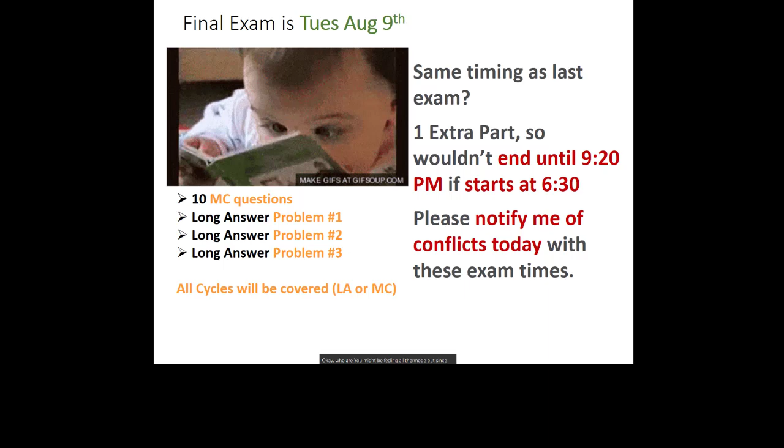But because we're drinking from the fire hose in this 6-week time frame, it's time to start thinking about the final exam as well. We wrote the second midterm yesterday, so about 2 weeks from yesterday, not next week but the week after, Tuesday August 9th, is when I'm tentatively scheduling the final.

I will need your help and some input from you about what time works. Unlike the midterms, which were 10 multiple choice and 2 long answer problems, the final exam will be 10 multiple choice and 3 long answer problems.

Good news is that the final exam will have equally weighted parts, so the multiple choice ends up being weighted a little less than in the midterms. I think it's worth 30% in the midterms and 25% in the final.

If we start at 6:30, since the exam will be longer, we'll still get the same amount of time for that extra long answer problem. There'll be an extra 5-minute break after problem 2, and then an extra 40-minute problem. If you have accommodations, you'd scale that time accordingly. But that means if we start at 6:30, we won't be finished until 9:20.

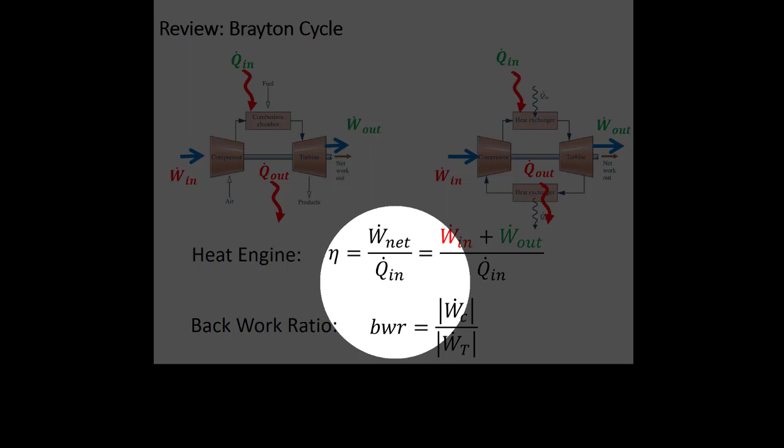So last class we talked about Brayton cycles. When we think about those 3 questions: how do we characterize the cycle? This is a heat engine, so it takes heat in and turns it into net power, which means we characterize it by its thermal efficiency—the net power over the heat rate in—or we can think about it as a backwork ratio, the magnitude of the compressor power divided by the magnitude of the turbine power. That's acknowledging that the compressor is the first consumer of the power plant.

So the second question is, when we look at each process, is it an open system or a closed system? For this cycle, because each process happens in a different place, like an assembly line, that means it's a series of open system processes. That means we use the open versions of the first law and the second law.

Our third question is, what's the fluid? Here the fluid is air, or some other ideal gas. That's what makes it different than a Rankine cycle, because it's very similar to a Rankine cycle, since the answer to the first two questions are the same, that it's a heat engine with open processes. But because it's a different working fluid, we fix the states differently.

If I was drawing a TS diagram, at least of a 4-component Brayton cycle, this is what it looks like. We go through this ideal compressor, then we add heat, then we go through an ideal turbine, then we reject heat.

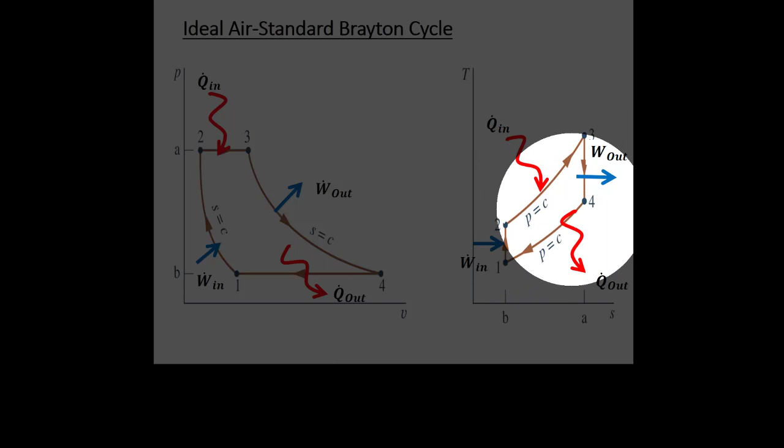If we try to do the analysis, because it's a series of open systems, we apply the open version of the first law. We make all of these assumptions for the different components, hopefully assumptions we're getting used to making. And we find that if we're trying to find work, it's m dot times h in minus h out. If we're trying to find heat transfer, it's m dot times h out minus h in. We let the first law deal with the signs, understanding that heat in is positive and work in is negative. But now we get to the point where we say, what's the fluid? How do I fix these values of h's?

And because it's an ideal gas, we need to use the ideal gas law, right? That might be useful as we move from state to state.

But my argument to you, and I've been teaching the class for a long time so I think it's a good argument, is that when you have cycles where the working fluid is an ideal gas, you need to be able to identify where any isentropic processes are. So where are the processes where you get work and usually don't have heat transfer? Where are your ideal turbines and where are your ideal compressors inside the cycle?

That's where you're going to be able to use these different expressions. And if it's a variable specific heat problem, then because it's an open system and we normally know pressure ratios, you get these relative pressures, PR over PR, and you'll get this pressure ratio. So if you know the compressor pressure ratio, you can use that to find PR at the exit of the compressor, and then go to table A22 and interpolate backwards.

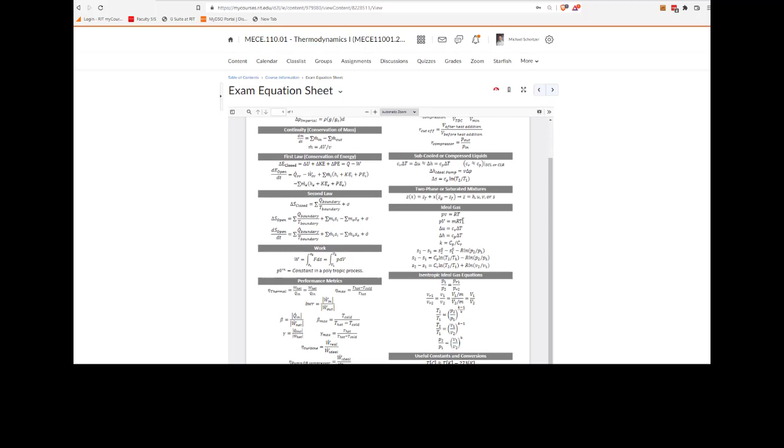So if I go to course information on the My Courses page, I like to look for this exam equation sheet. This is the one that I wrote. If you were writing the exam in person, this is the only reference material you'd get aside from the tables. Here we can say that if we have ideal gases, then I can use all these equations. But if they're isentropic ideal gases, then I can use these equations.

So if it's constant specific heat, I use one that has K in it, because anytime I have an equation that has Cp, Cv, or K, which is Cp divided by Cv, in order to write that equation down, I have to have assumed specific heat is constant, otherwise I'd be integrating that specific heat value over the range of temperatures, which we just wouldn't do. That's why we have the tables. But if you want variable specific heat for a more accurate answer, you use table A22, and then an equation with PR over PR or VR over VR, which are things you look up in the tables. Now, which equation do you pick?

My argument is that if it's an open system, you're probably going to know the pressure ratio. So if you're talking about a Brayton cycle with a bunch of open systems, you'll know pressure ratios. If it's constant specific heat, you use T over T equals P over P to the power of K minus 1 over K. If it's variable specific heat, you use P over P equals PR over PR. But when we did internal combustion engines where the processes were closed, we knew volume ratios, so I would use T over T equals V over V to the power of K minus 1, or the equation with ratio of VRs equal to ratio of Vs. There's also an equation in the book that we put on the equation sheet, but personally that's not one I use myself.

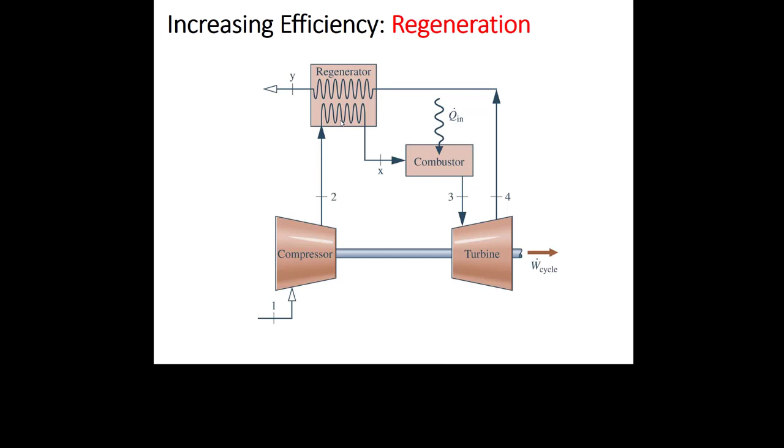Then we talked about how to improve the performance of these Brayton cycles. One way is we take the hot exhaust gas and transfer some heat from it into the pre-combusted fuel or fluid, trying to reclaim heat we'd otherwise lose to the environment. We call that regeneration.

Then we can do reheat, just like in Rankine cycles, splitting the turbine into two turbines and heating the fluid back up in between. That gives more enthalpy in the fluid going into the second turbine, so we can harvest more mechanical power from that second turbine than if we just went through one turbine.

Unlike Rankine cycles, backwork ratios are relatively high in Brayton cycles because it takes more power to increase the pressure of a gas than a liquid, since gases are compressible. So we want to reduce the power consumed by the compressors, and one thing we do is split the compression process into two parts and cool the fluid in between. That increases net work, not by increasing power created, but by reducing power consumed, so net work goes up.

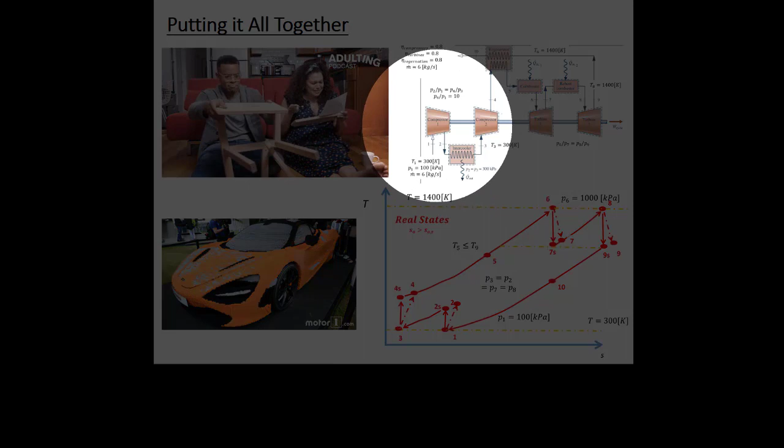Then what we did is take all of those parts and put them together in the last example from the last class. It's pretty complicated, but it's something I've asked on final exams before, walking through a process like this. It wouldn't be as much work as the example we did last time, because you wouldn't get a state table that's mostly empty like before. Instead you'd get a state table that's mostly filled out, but we'd expect you to find the isentropic efficiency of the first compressor or one of the turbines, figure out how to deal with the regenerator, and find H5 and H10. Those are things we can ask you. So the message is you'll probably see some complicated stuff on the final.

Try not to look at that problem and say, I don't know what's going on, it's too hard. Instead, look at the state table, notice it's mostly filled out, and say, I know the process for how to do this. Most of it is going to be symbolic work, which doesn't take that much time if you know how to do it. So really focus on picking the right equation and making the right assumptions so you can get the symbolic equation. That's the high-level overview of what a Brayton cycle is.

And it leads us into turbojets. Turbojet engines are jet engines that you'd see anytime you fly anywhere. Sometimes when you fly in and out of Rochester you have turboprop planes, but if you have a jet engine, this is probably what's hanging under the wing there. It's kind of cool because the core of this, as we'll see, is a Brayton cycle, but there's some extra things going on.

I like to ask this question when we start to look at these turbojet engines: what is it that we need in order to fly? You can think in your head if you don't want to answer out loud.

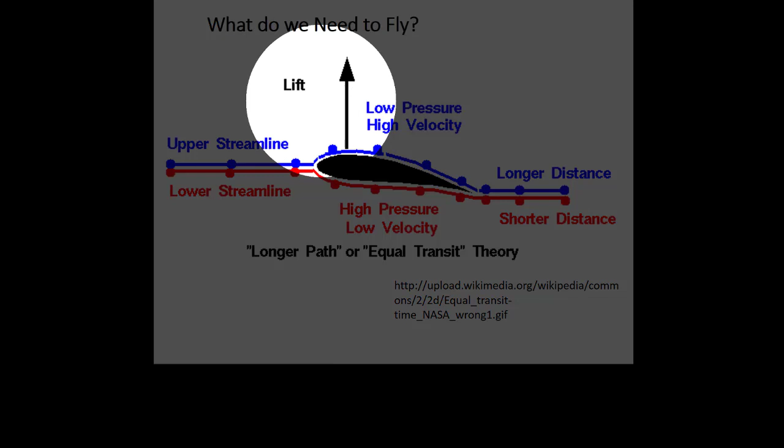What you'll learn in fluid mechanics is that the design of a wing is actually really important. The shape, the cross-sectional shape of this wing, is really important for how it flies. Because how an airplane flies, yes, lift is super important - that's what happens in this particular problem. The way we generate lift is we make this wing that has a very special shape.

When air flies over it or is pushed over the wing, what happens is we generate high pressure air underneath the wing and low pressure air on top of the wing, and that comes from the shape of the wing. It's super cool. So you've got high pressure underneath the wing and low pressure on top, so you have a net force up on the wing. And if that net force is high enough, then you can get this heavier-than-air machine that's full of people and their luggage to fly through the air. It's kind of a triumph of human ingenuity.

But how do we get lift? In order to get lift in this picture, we need air to be flowing over the wing at a high rate of speed. So in order to do that, we need to generate thrust, and that's the job of the engine. We're going to talk about turbojet engines, but it's true of propeller planes too - you're trying to essentially push the plane forward fast enough so that even if the air is still, or even if you've got a tailwind, so even if the air is kind of going the wrong direction, the plane is moving fast enough relative to the air that it looks like, if you're a crazy person standing on the wing, it feels like the air is really whipping into your face. So the important thing here, in terms of this course, is the thrust that gets generated by this engine.

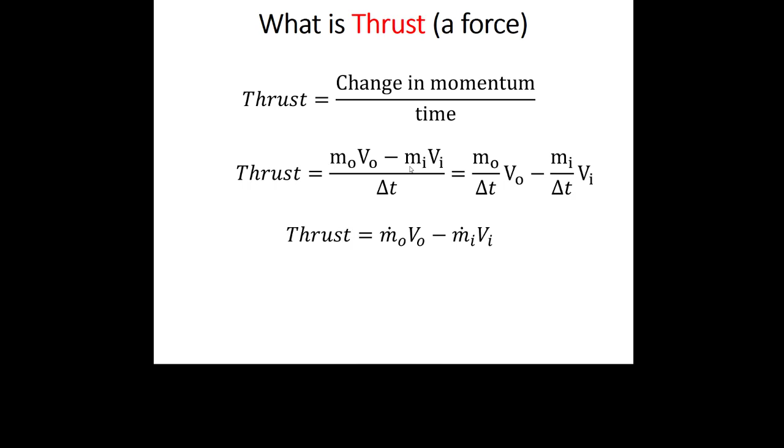Thrust is defined as the change in momentum over time. Momentum is mass times velocity, divided by time delta T. Or we could say mass over delta T times velocity out - that's the air going out of the jet and the air going in. So what the jet is trying to do is push air very fast out the end of the jet - it takes in air and pushes it out faster. So mass divided by delta T, if we take the limit as delta T becomes infinitesimally small, becomes a mass flow rate. So the mass flow rate times the velocity of the air out minus the mass flow rate times the velocity of air in is equal to our thrust force.

Right now, if the jet has one air inlet where it's sucking air in, maybe you've seen those super slow motion videos where they test the blades, chucking like a frozen turkey into a jet engine. You should check that out because it looks awesome on the high-speed videos.

There's really only one mass flow rate because there's only one inlet and one outlet here. So the thrust force is the mass flow rate times the outlet velocity minus the inlet velocity.

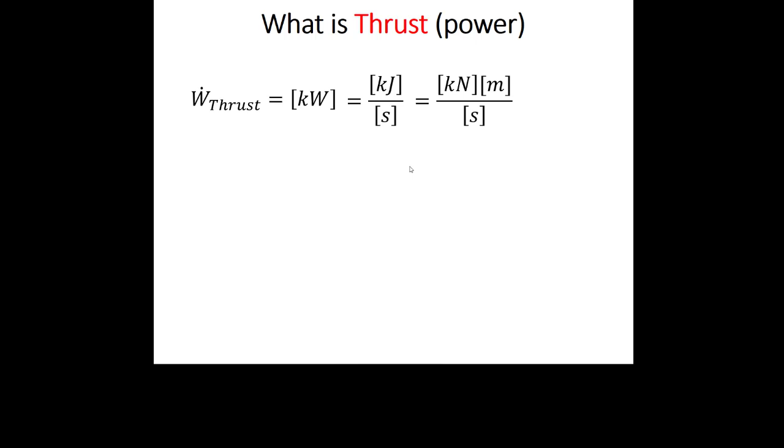But if you think about thermal efficiency, we want this in terms of power. So how do we get from a thrust force to a thrust power? Power is kilowatts, which is kilojoules per second, and what we have is thrust as a force, so kilonewtons. Kilonewton meters is kilojoules, so kilonewtons times meters per second is the same as the thrust force times the velocity. So if we take the thrust force times the velocity of the jet, then you can get a thrust power.

So if you're looking for thrust power, you take your thrust force, the mass flow rate times V out minus V in, times the velocity of the jet, and that would give you the power developed by the engine.

Notice this is different, because every other time we've talked about power, the reason we don't ask about thermal efficiencies for turbojet engines is this is not mechanical power in the way we've thought about it for other engines. It's not a rotating shaft, which we could get an electrical engineering friend to put on a generator to turn into electrical energy. So this is thrust power, the power of the jet coming out of the back of the engine.

Now the energy cost, well, this is just like your automobile, or your Brayton cycle or your Rankine cycle - it's the heat in. So here we're burning jet fuel, so we need chemical engineers, because they're going to take oil and separate it into all these different chemicals, one of which is jet fuel. So it's still going to be heat in. We're going to burn that jet fuel at a particular rate, it's going to give us a certain amount of heat or heat rate, and that'll give us our thermal efficiency.

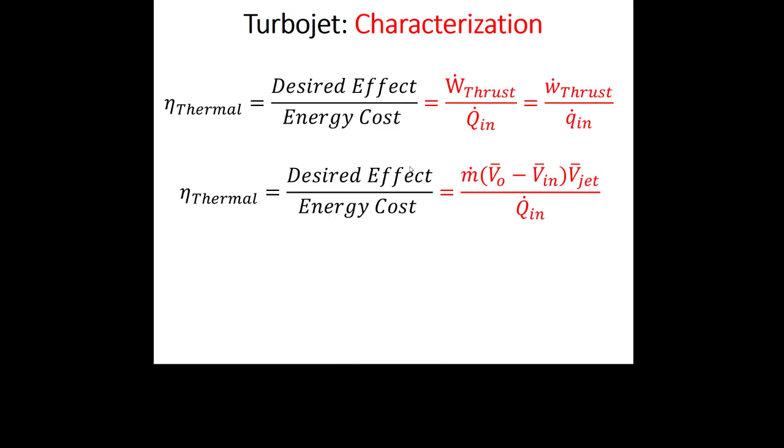But we don't really talk about it this way in the textbook. So I'm never going to ask you about thermal efficiency of a jet, but I just want to show that it's possible to still think about it like this, as an energy benefit divided by an energy cost.

One of the tricky things about jet engines - maybe there's a couple of things. First, your airspeed matters. Maybe you've been on a plane where they tell you we're running a little ahead of schedule because we've got a little bit of a tailwind. So that matters, but for us, we're always going to assume that the air is still.

And we're usually going to think about the problem as if you're that crazy person standing on the wing. So it feels like the velocity of the air is whatever the jet velocity is, but just in your face instead. So your frame of reference is that crazy person standing on the wing.

So this is, at least schematically, how we can think about a turbojet engine in terms of a thermodynamic device. It's got a diffuser at the beginning, because the jet is screaming forward, but we're going to think about it as if we're standing on the jet. From the perspective of the engine, it feels like the air is coming into the diffuser with some form of kinetic energy because it feels like it has a velocity.

Even though the air is still, for somebody standing on the ground, it feels like if you're standing on the wing that it's really windy. So we're going to take that kinetic energy of the air and turn it into enthalpy.

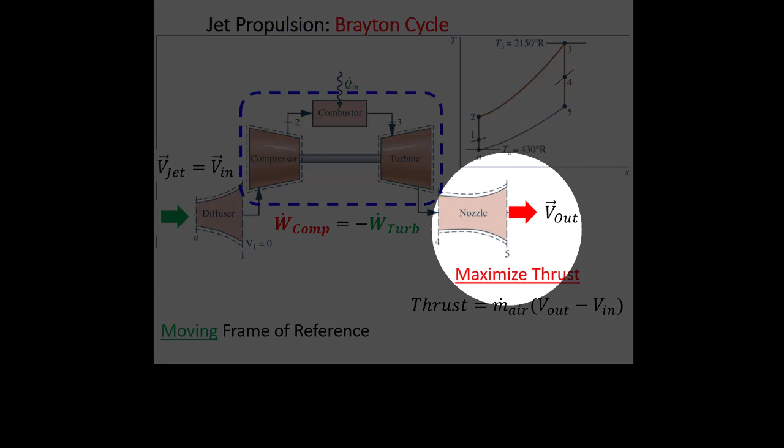And then there's a turbine. So after we add heat, we've got a lot of enthalpy in this fluid. We're going to take some of that enthalpy out of the turbine, but try to leave as much enthalpy as we can at state 4, because our job for this engine is not to maximize the turbine power. That's why turbojets are different than Rankine cycles and Brayton cycles, because the job here is to maximize the kinetic energy at the outlet of the nozzle.

So we solve this mostly like a Brayton cycle problem, except there's a nozzle and a diffuser. And when I tell you that, the hairs on the back of your neck should stand up a little bit—your spidey sense should be tingling—because that means kinetic energy, at least when we're outside the jet, at a state that's not touching the Brayton cycle, is important. That means units are going to be a problem. So how do we solve this problem?

We start at the diffuser. The diffuser's job is saying, well, if this air is coming in with some velocity, why don't I harvest that velocity to increase the enthalpy before I even get to the compressor?

So it looks like, as in the labeling here, this is one of those things where I think the textbook tries to help us, because it's still state 1, 2, 3, 4 here as we go through the Brayton cycle part of the turbojet. They try to keep that numbering the same. But that means they needed something else to call the inlet of the diffuser, and they call it state A. So usually we stick with that nomenclature.

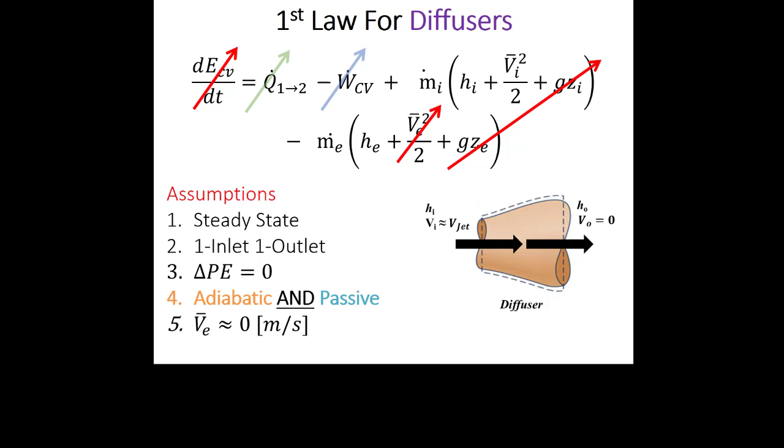But the thing we're going to do here, when we think about these things in turbojets, is we're going to cancel out one of the kinetic energy terms. Now, what it looks like here is that we're saying the exit velocity is 0. We know that's not true.

Really, what we're saying here is that at the inlet, both enthalpy and kinetic energy are important, because the kinetic energy is high. But at the outlet, or the exit, enthalpy is certainly important, but we're going to assume we've dropped that kinetic energy low enough that it doesn't matter anymore. And remember, the velocity here, even though it gets squared, has to be pretty high to matter, because even though this looks like velocity squared over 2 in metric, this would be in joules per kilogram instead of kilojoules per kilogram if my velocity was in meters per second.

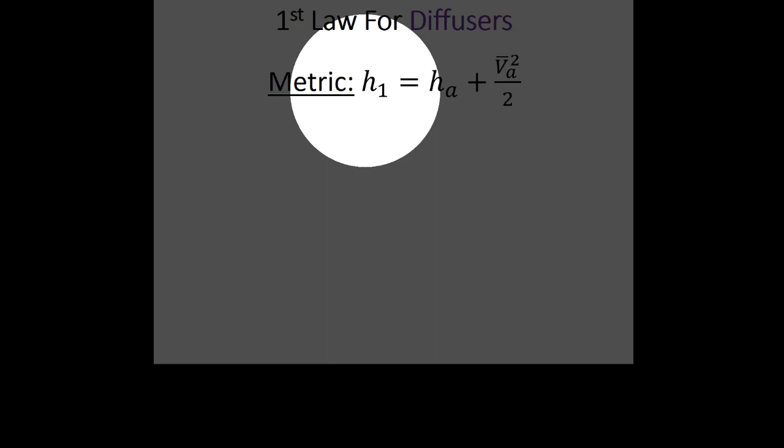So then I'd have to divide not just by 2, but convert 1 kilojoule equals 1,000 joules, so I divide by 2,000. That number gets small quickly, right? So we're going to assume the kinetic energy is small enough that we don't really care about it at the exit of the diffuser. So at the inlet, enthalpy and kinetic energy are important, but at the outlet, it's only enthalpy that matters.

Now, unfortunately, you're still going to have to do problems in the imperial unit system here. The units, no matter what, this kinetic energy term is going to be tricky because you're probably still going to have to deal with units here, since this is probably going to end up in joules per kilogram. When you look it up in the textbook, it'll be kilojoules per kilogram.

So the units still matter in metric, but it's even more tricky in imperial because first you've got to divide by GC just to get the right quantity, energy per unit mass, but the energy here is going to be in feet per second squared if your velocity is in feet per second. Or sorry, this term is going to be in foot-pounds per pound mass. So not only do you have to divide by GC, but if the velocity is in feet per second, you also have to multiply by 1 BTU per 778 foot-pounds force. So that's the kinetic energy term.

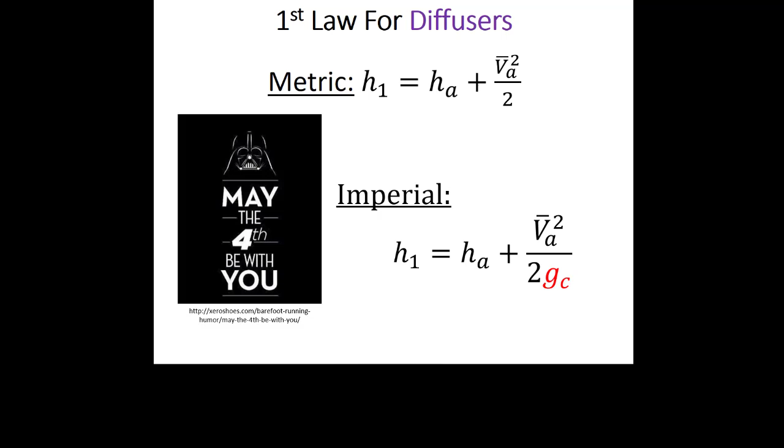So the diffuser is one of the places where people get tripped up, dealing with the units, particularly of the kinetic energy on the diffusers and the nozzles. So the units here are important. That's how we go through the diffuser.

Next, we're going to go through the Brayton cycle. Now, mostly this is the same as a normal Brayton cycle, but there's a wrinkle here when we get to the turbine. Because normally when we go through a Brayton cycle, a couple of things are true: the inlet to the compressor, or at least the first compressor, is the atmosphere, and the outlet from the last turbine is also the atmosphere.

So those two things have the same pressure, but that's not true here. It's not true here because neither of those two components touch the same reservoir. They're not touching the atmosphere, because one is touching the exit of the diffuser and the other is touching the inlet of the nozzle. So those pressures are not equal. That's the first thing that's tricky. So we can't solve these things by assuming that, oh, the compressor ratio is 10, so the pressure ratio through the turbine must be 1 over the compression ratio. We can't do that.

So instead, we remember that the job of the turbojet engine is to maximize this outlet velocity. And in order to do that, we need as much enthalpy sticking around at state 4 as we can. So we're only running the turbine so that we can run the compressor. Although maybe you'd argue in a real jet it's not just running the compressor, it's running the compressor plus whatever systems are on board.

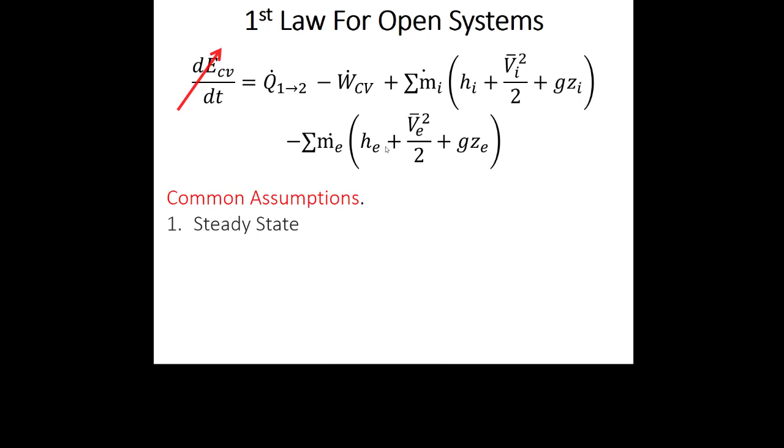All of the components will be steady state. They're all one inlet, one outlet—there's no splitting of mass here. We're going to neglect kinetic energy inside the system, as long as it's not a state touching the outside. We'll also neglect potential energy changes. Looking through these components, some are adiabatic, like the turbine and compressor, but the heat addition is passive, so there's no power there. Again, we'll neglect friction losses and heat losses throughout the system.

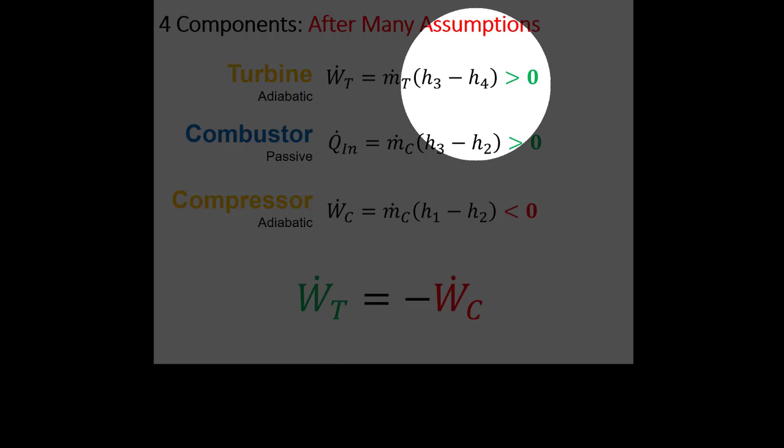Inside the Brayton cycle, we get equations we're used to: turbine power and compressor power equal m dot times h in minus h out, and heat rate in is m dot times h out minus h in. The important thing is that the magnitude of the turbine power equals the magnitude of the compressor power—that's how you solve for H4 at the exit of the turbine. This is different from a normal Brayton cycle, where you'd find the ideal outlet of the turbine and use isentropic efficiency. Here, you just say the real compressor consumes a certain amount of power, so the real turbine must produce that same amount of power.

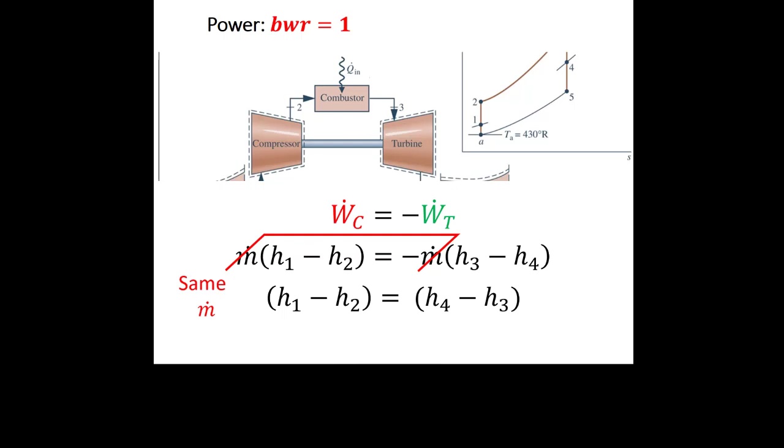So if the back work ratio equals 1, then m dot times h in minus h out on the compressor side equals the negative of m dot times h in minus h out on the turbine side—equal magnitude but opposite sign. The mass flow rates are the same because the whole system is steady state, one inlet one outlet throughout, and everything is arranged in series. From this equation we typically solve for H4: H4 equals H1 minus H2 plus H3. Typically, if there are isentropic efficiencies, it's the real compressor power that equals the real turbine power.

So that gets us up to state 4. But we're not done the cycle yet, because the whole reason we're doing this is the nozzle—we want to maximize the velocity at the outlet of the nozzle. We want as much velocity at state 5 as we can get, which is why we tried to keep as much enthalpy as we could at state 4, because the nozzle's job is to take as much enthalpy from state 4 as it can and turn it into kinetic energy. So kinetic energy is going to be important here.

The units are going to be a pain, but don't let that intimidate you—once you do it two or three times it's not too bad. Maybe two or three times in metric, and three or four times in imperial units, since it's a little trickier there. For the nozzle, we're at steady state, one inlet one outlet, no potential energy change, both adiabatic and passive—so far it looks just like the diffuser. Just like the diffuser, one of the kinetic energy terms goes to zero, the one that touches the Brayton cycle. But unlike the diffuser, it's the inlet kinetic energy that goes to zero, not the outlet kinetic energy.

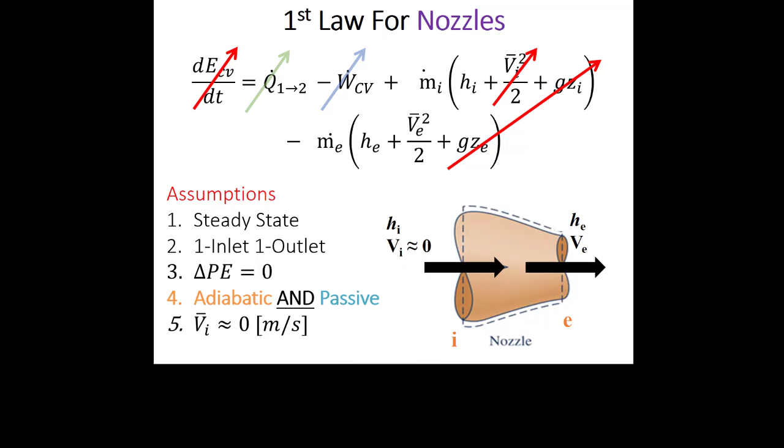So here we're solving for the exit kinetic energy, the kinetic energy at state 5, at least in the picture we looked at. We're typically solving for the velocity at the exit, though the problem could also ask for the kinetic energy at the exit. Remember that H is in kilojoules per kilogram if it's metric. Velocity squared over 2, if velocity is in meters per second, comes out in joules per kilogram. So you need to multiply by 1 kilojoule divided by 1,000 joules—meaning you're probably going to divide by 2,000 and not 2.

You're still going to have some problems with imperial units, and it's always worse with imperial units. Now we're not just dividing by 2 on the kinetic energy term, we got to divide by 2gc, and that gives us the right quantities. It gives us energy per unit mass, but it's not BTU per pound mass, that's what we're going to look up in the textbook. It's foot-pounds per pound mass. So if your velocity is in feet per second, you're going to have to multiply this by 1 BTU divided by 778 foot-pounds force. It's always a little harder in imperial units, but it's still this kinetic energy term that's going to give us problems no matter what the unit system is.

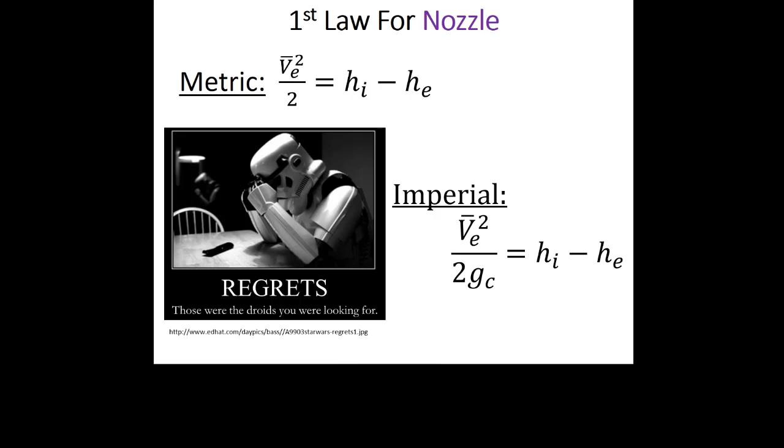We got to remember, if we're solving for kinetic energy, or if we ever had a problem where we were solving for potential energy change, we still have that same problem with the units.

So if we're just writing down the equations that we have for this turbojet engine, making the assumptions I would normally make: compressor power and turbine power are still going to be m dot times h in minus h out. Heat rate in is still going to be m dot times h out minus h in. At the diffuser, at the inlet, I've got enthalpy and kinetic energy. I got to add those two up to find the enthalpy at the outlet of the diffuser, which is the same as the enthalpy at the inlet to the compressor. And if I'm trying to find the nozzle velocity or the nozzle kinetic energy, that's going to be the change in enthalpy across the nozzle.

Units are going to be important, even if it's the metric system, which is generally more friendly, I think. It's still going to be a problem with units here.

I had an old professor, and he would always tell us that it's only about 10% of what the professor says that's actually important for your exam. And the professor, who is the person that writes the exam, thinks that the things they say multiple times are the important things.

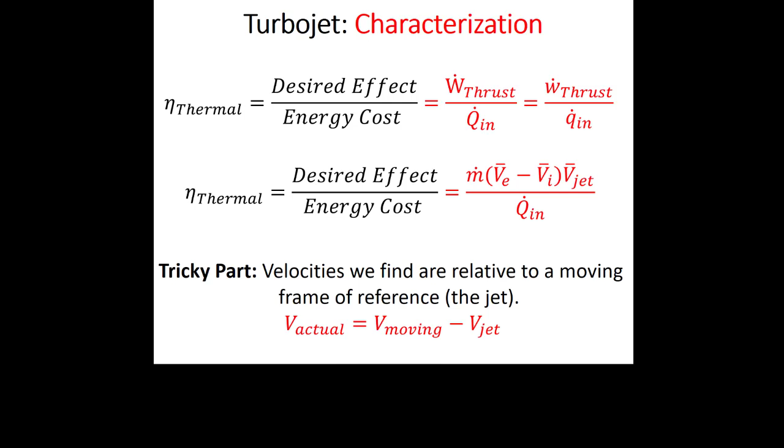Again, we're not going to ask you this on exams. On the final exam, I will never ask you for the thermal efficiency of a turbojet engine, but we could still think about it the same way we think about thermal efficiencies for all the other engines, where it's the energy benefit over the energy cost. So even though I'm not going to ask you this equation, I think it's important to understand the concept here, because the difference between the turbojet engine and all the other heat engines we looked at is that all those other engines were trying to maximize the net work or net power. But here, the thing we're really trying to maximize is this velocity at the exit. And if you remember that, I think you probably have a better chance of remembering that the back work ratio here is 1, or that the power consumed by the compressor has the same magnitude as the power produced by the turbine.

Now, generally there's not too much different for different turbojets, but there is one thing that we can do, right?

I haven't seen the new Top Gun movie yet, but I remember my dad had the VHS copy of the old Top Gun movie that we would watch frequently because he'd just installed this new sound system in whatever year it was, the late 80s or early 90s, and we would listen to Top Gun over and over again. In those military aircraft, not commercial aircraft but military aircraft, you might also have an afterburner, right?

An afterburner is basically reheat for a turbojet engine. After the turbine, before we get to the nozzle, what we want is to get as much enthalpy into the fluid as we can. That's why the backwork ratio was 1. But maybe there are applications where fuel efficiency is less important than pure performance, or pure power generated by thrust from the engine. So typically this is something on military grade aircraft, but you don't see that on commercial airliners, which are far more concerned with fuel efficiency versus maximum speed. So one of the ways we could increase the enthalpy between the turbine and the nozzle is by burning more fuel. This is what an afterburner is.

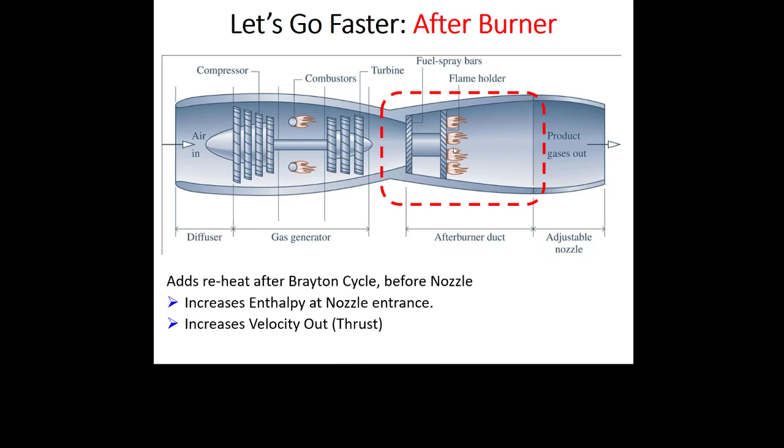Now, if I was drawing a TS diagram for an afterburner system, at the beginning it looks the same: isentropic diffuser, isentropic compressor, we're still adding heat through the combustor, we still go through the turbine, and this one looks isentropic. But then, in between, we add heat and then go through the nozzle, whereas in the normal system we would just go straight through the nozzle here. So I think of this as the same as reheat - it's just instead of being in between two turbines, we're in between the turbine and the nozzle. But you see here that the nozzle on my TS diagram does the same thing as the turbine: it reduces the enthalpy and drops the pressure, but it does that in service of generating kinetic energy instead of generating mechanical power.

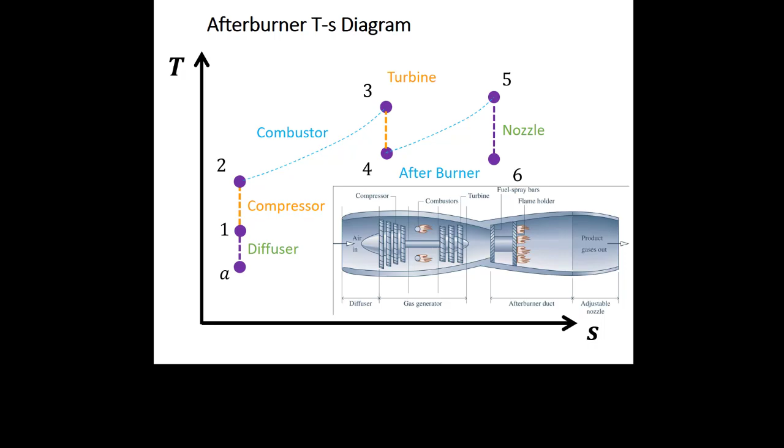So that is the end of the introductory part of these turbojet engines. But what we'll do is come back for an example - let's come back at 7:25, so maybe 7 minutes or so. I will see you in a bit.

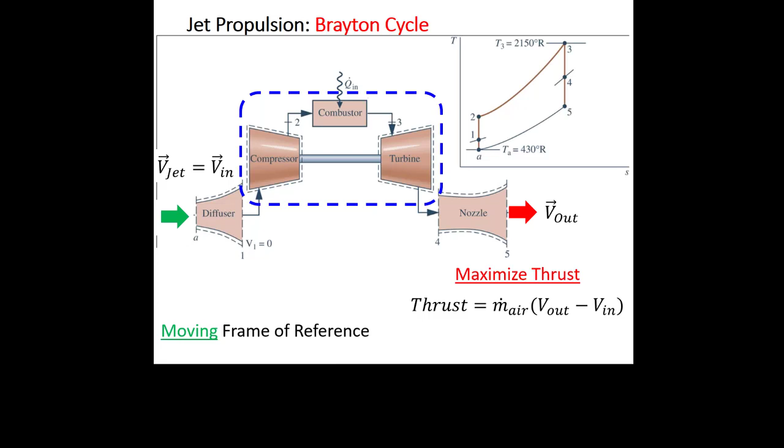So we introduced the idea of these turbojet engines last class, over the last hour or so, and we found out that really the idea here is to maximize the thrust, which for us means trying to get as much velocity out the back of the engine as we can. If you were looking at the jet from the ground on a stationary frame of reference, the jet is moving through the air - we're going to assume that the air is always still. But we're going to think about this problem as if we were a person standing on the wing of the plane. So even though the air is still in a stationary frame of reference, in that moving frame of reference it really feels like the wind is blowing really hard in our faces - so don't try that at home. Now, because we're trying to maximize the thrust, that means we're trying to get as much velocity out the exit of the nozzle as we can. In the middle of this system, between the diffuser and the nozzle, is a Brayton cycle, but it's a little bit of a special Brayton cycle because it does not have equal pressure ratios, or the reciprocal of the pressure ratio, through the compressor and the turbine.

Instead, what we have is a case where the backwork ratio is 1, so the magnitude of the compressor power is equal to the magnitude of the turbine power. As we go through the example, we're going to see why that's important. That'll let us get H4, but also, as we'll see, it lets us get P4 as well.

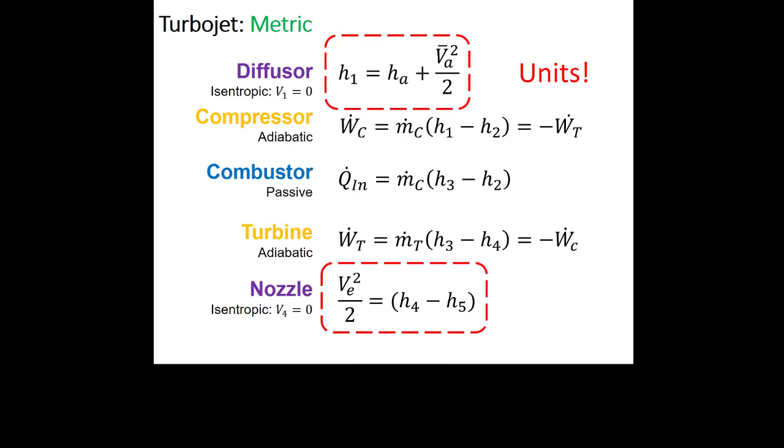If we have a metric problem, we're going to assume that this is how we calculate the result of the first law on all the different components. Remembering that the units are going to be tricky, even if it's metric, we're probably going to have to divide that velocity term by 1,000. And if it's imperial units, the equations get a little bit trickier because we got to divide by GC, and the conversion factor is a little different because we're probably going to have to multiply by 1 BTU per 778 foot-pounds, provided the velocity is in feet per second.

So what we're going to go through now is an example problem for a turbojet engine. Here we have a turbojet engine where we're given some state information, we're told the mass flow rate, we're given the compressor pressure ratio, and we're told, sometimes in a bit of a tricky way, the maximum temperature inside the engine. So I need to know how to draw my TS diagram so that I know where the maximum temperature is. It's always before you extract work from the system.

So what are we told here? We know that CP is 1 kilojoule per kilogram kelvin. We're also going to say that K is approximately 1.4. We know the compressor pressure ratio P2 over P1 is equal to 11. We're asked to find the temperature and pressure data, so we want to fill this out, and we want to know the heat rate in and the velocity at the outlet.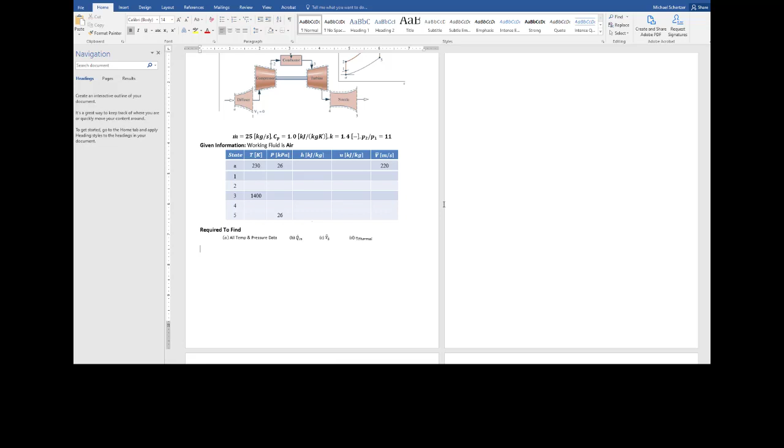I think in the notes I go through how to do this both as constant specific heat or as variable specific heat. I won't do it both ways here, but if you have a preference, you can type it in the chat because I can do it either way. I don't care which way that I do it, but I won't do it both ways here. If you go through these notes, you start to see both ways, cold air standard and variable, so constant specific heat and variable specific heat. So does anybody have a preference?

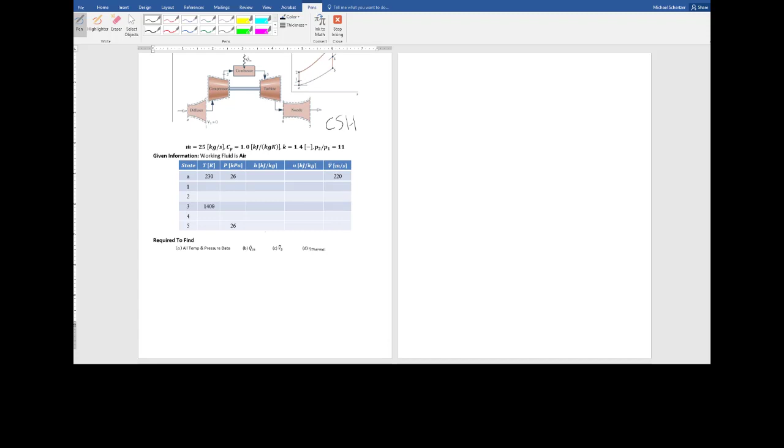Okay, I don't see anything in the chat, so I will go with constant specific heat because I think it's a little bit faster. I'll try to note at least the equations of maybe how to do it the other way. My preference is always to do the symbolic parts first. This I'm not going to do because we're not going to ask you this on an exam, so I won't go through getting the thermal efficiency of the engine.

So here, if I want to know Q dot in, for part B, I do the first law. First I got to pick my control volume over here. I guess most formally, I would do conservation of mass, dm by dt is equal to the sum of m dot in minus the sum of m dot out. But this is steady state, one inlet, one outlet, so m dot in is equal to m dot out. I only have one mass flow rate here, actually through the whole problem, because all of these components are one in, one out, and they're all aligned in series. So there's only one mass flow rate in the problem, which makes sense because they only gave us one mass flow rate. So this is 25 kilograms per second.

But it asked me for the heat transfer rate, so then I'm going to do the first law. dE by dt is equal to Q dot minus W dot plus the sum of m dot in, h in plus, I look at the units here, and because it's a metric problem, I'm going to leave this as v in squared over 2 plus gz in. So there's no GCs in this problem because it's not imperial. M dot out, h out plus v out squared over 2 plus gz out.

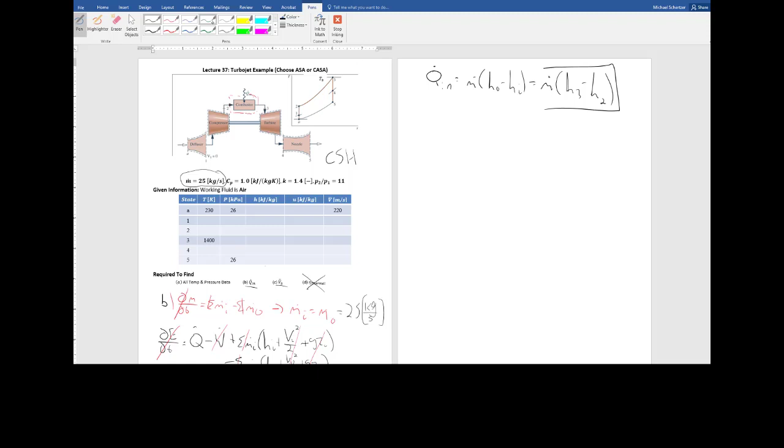So this is my symbolic solution for part B. The good news is I know the mass flow rate. The bad news is I don't know H3 or H2.

The other thing here is because I've already said I'm going to do this problem as constant specific heat, my equation becomes m dot times Cp times T3 minus T2. Because I'm doing this as a constant specific heat problem, I never would have cared about U, specific internal energy, in this problem. I'm not going to care about the individual H values. All I want is temperature and pressure for all these different states. So this is Q dot in.

Part C asks me for the velocity at state 5. For this, I'm going to have to do a first law analysis on the nozzle.

Now the equation stays the same, right? dE/dt equals Q dot minus W dot plus the sum of m dot in times H in plus V in squared over 2 plus GZ in, minus the sum of m dot out times H out plus V out squared over 2 plus GZ out. Both of these, no, I lied. I was going to say both of them are divided by GC, but that's not the case because it's a metric problem, not an imperial problem.

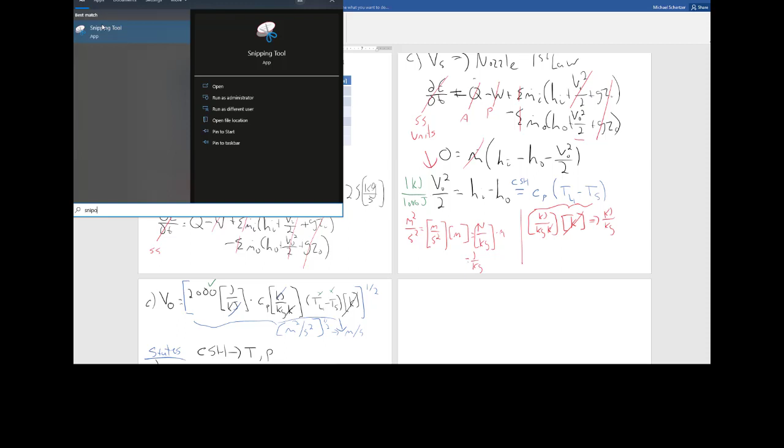State A: ultimately, because we're doing this with constant specific heat, what we want to know is the temperature and the pressure of all the different states. The beautiful thing about state A is we have both. T at state A is 230 Kelvin, P at state A is 26 kilopascals.

From state A to state 1, I ask myself, since air is the working fluid, is delta S equal to 0? And the answer is yes. Now, normally that would mean I could say, and this is definitely true, for this particular state...

I can write down my isentropic equation: T1 over TA is equal to P1 over PA to the power of K minus 1 over K, or T1 is equal to TA times P1 over PA to the power of K minus 1 over K. The awesome thing here is I know TA, I know PA, and I know K. The bad news is I don't know T1 and I don't know P1.

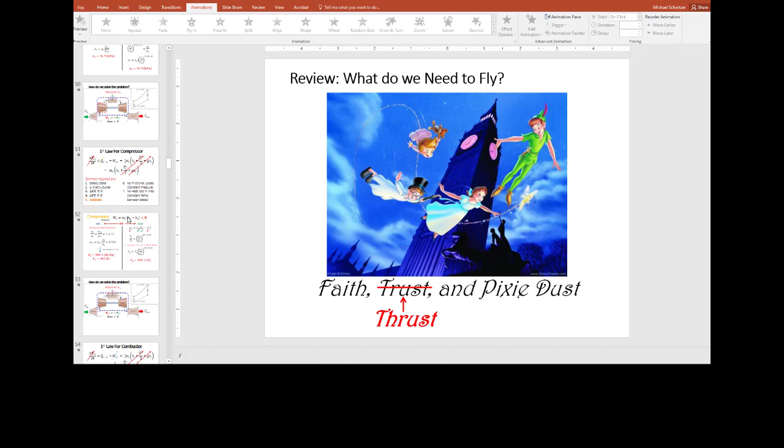I think it might be too confusing if I, in parallel, try to do this as a variable specific heat problem. But if you go to the notes, as you're going through from 1 to 2, you can see we get the temperature here and the pressure. So in the notes I do it in parallel as variable and constant specific heat, so you can still see how that's done.

Now, as I go from state 2 to state 3, this is heat in. Because there's no friction losses, that means P3 is equal to P2, which in this case is 405.9 kilopascals.

And I don't have to do anything to figure out T3. It could be if they told me Q dot in, then I could use that to find T3. But I don't have to do that because they told me T3 is 1400. So state 3 is done.

And that's good. Now we have T4 and P4. Now we got to go from state 4 to state 5, which is the nozzle. The nozzle, we're also going to assume delta S is equal to 0. We have also done the first law on the nozzle. And the first law told us, that was the equation we did right here up at the top when we were doing our symbolic solutions.

So it told us that V out squared over 2000 is equal to Cp times T4 minus T5. So V5 squared over 2000 is equal to Cp T4 minus T5. We're doing okay here in that we know Cp, now we know T4. If we knew T5, then we could solve for V5, right?

And the way we get T5 is we know that this is an isentropic process. So it's really important to know where these isentropic processes are. So because it's an isentropic process, that means that T5 over T4 is equal to P5 over P4 to the power of K minus 1 over K. P5 is the same as PA, which I believe was 23 kilopascals. 26 kilopascals.

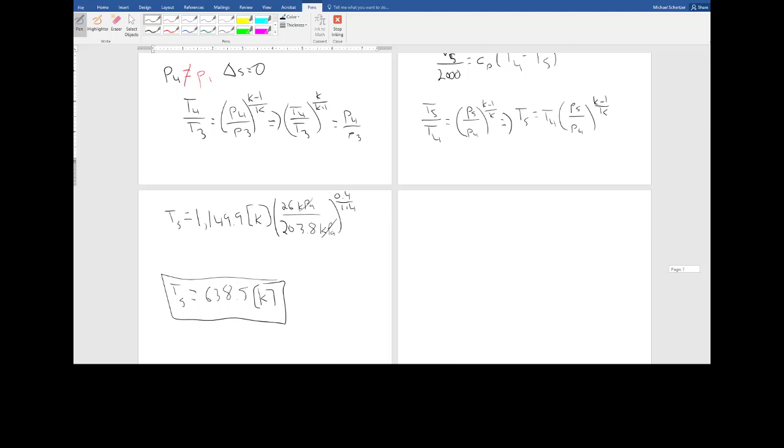So now I fixed all the states. Right, so because we fixed all the states, now we, so here we have T3 and T2. I had an equation for V out. Now I know T4 and T5. I'm going to go back to the notes to show you what the actual numbers are here.

So V5, we're always talking about the moving frame of reference here. This is about 1,010 meters per second, right? T5 we have here. The other piece we wanted to know was the heat transfer rate, which we solved here.

And you can see, even in this problem, where we're getting big temperature swings, we still get pretty good agreement with the constant specific heat and variable specific heat. Although here, 11%, that's still a sizable number, but it's still giving you qualitatively good information, right? Depending on what these temperatures are in.

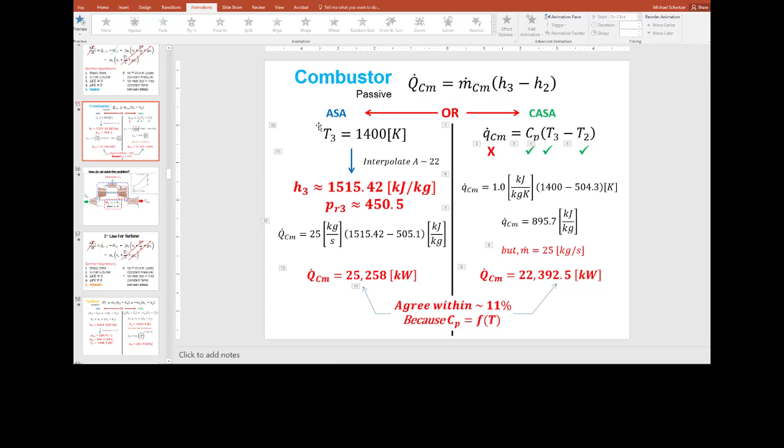If you make some kind of a change in your system, you can see, will that increase my heat transfer rate or reduce it? But you can see that if you really want—because the temperature differences here tend to be large, right—using the tables gives you a better number. And this is the more accurate number, right, with the variable specific heat or the air standard analysis.

And here you can see for the velocity, it's again a reasonable difference here. So that's how you do the problem of the turbojet. Does anybody have questions?

So I think the big things here are you need to get your units right when you talk about those kinetic energy terms. You need to remember that the back work ratio is 1, so that when you're solving the exit of the turbine power, you need to say that the back work ratio is 1 of the real components. And then you find the pressure drop across the turbine by using that isentropic relationship. So going through the turbine is a little bit backwards compared to how we would do it in a Brayton cycle.

Welcome back, everybody. Let's see, it looks like Jules just emailed me or sent a picture in the chat. Oh, good, nice. So here we see one that's really complicated.

This will be good, so we come out, we split out of this turbine here. This will be good, it'll be challenging, and challenging is good. So we will work on that next class. And oops.

Apparently it helps if you're not muted. I see the problem that Jules found there. It looks pretty complicated. So that'll be good, it'll keep me on my toes.

And it's nice to see, I hope it's nice to see me struggle, because that gives you some idea that you can do these problems like you've never seen before, as long as you follow the process we talk about. So we have some volunteers here for questions, so that's good.

If you want to see some other cases — this was from, I don't remember what summer it was from. Oh, there you go, last summer. So these are the problems that people brought in last summer.

Depending on where you live, you may have some familiarity with heat pumps and how they work, and how they can essentially be air conditioners in the summer and the equivalent of a furnace in the winter. So it's kind of the same piece of equipment.

So when we do these problems, they're also going to be open system problems. As we do these open system analyses, we need to know what the control volume is. We're going to do conservation of mass, and we're going to do conservation of energy.

And then sometimes we also have to do the second law too, right? So you might be asked to find the entropy generation rate.

But another way we thought about the second law was from the Kelvin and Planck statements. Kelvin and Planck told us this was about heat engines. They said you can make a heat engine, something that takes heat in from the hot place and turns that heat into work, but it can't turn all the heat into work because you have to cool the engine down. That's like the genesis of thermodynamics.

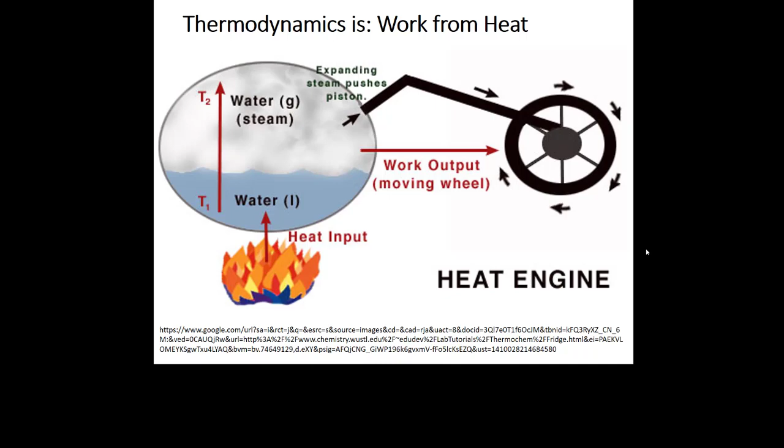So we're turning heat into work. For me, when I think about this, I think about the steam engine. The Industrial Revolution, in my mind, starts with the steam engine. I put this picture in because I think it looks cool.

But there's another problem at a similar time, and that's that it sure would be nice to be able to preserve food. There's all kinds of different ways that we can preserve food. One is we can salt meat. If you think about the age of sail and pirates, they talk a lot about salt pork, because it was something they could bring on ships and keep for a while.

You could smoke meat. My brother lived in Texas for a little bit, so he got indoctrinated into Texas barbecue. Usually when we go down there it's great, he's got briskets or ribs or something going.

And my grandparents, in their house, which is an older house obviously because they're older, they had a cold cellar. That was an uninsulated room that was basically open—well, not open, but didn't have insulation. So it was cold because the earth is cold as you dig down far enough.

So this has obviously never happened, but somebody like Clausius comes around and looks at that cold cellar and says, well, can I make a machine that keeps some volume of air cold? Can I make a refrigerator? And Clausius, when looking at the second law, thinks, okay, now we're not taking heat in from the hot place—we're pushing heat from the cold place to the hot place. And we can do that, but we can't do that and generate power. In order to do this, we have to be putting power in to get it to work.

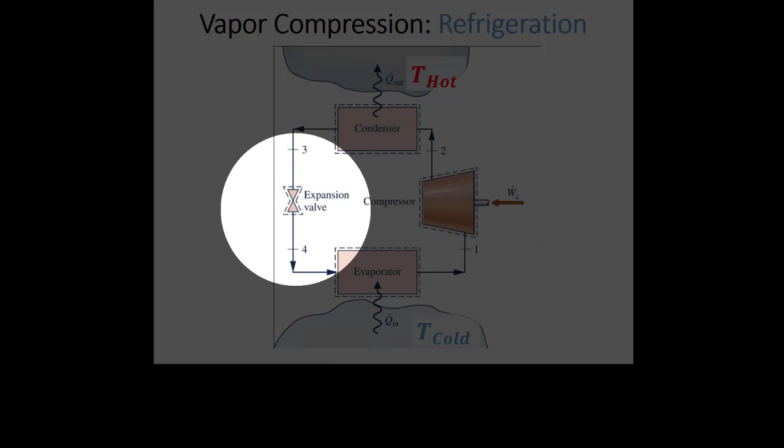Now, when we talk about refrigeration cycles, they're essentially Rankine cycles, but they run in reverse. So the cold part's at the bottom, the hot part's at the top, and we're going the wrong way around the cycle. We go into the compressor on sort of the turbine side, so when we have the vapor, we're not going through a turbine, we're going through a compressor. And instead of a pump, or instead of a turbine on the liquid side, we have this valve instead.

So what makes it a refrigerator is your perspective. If the thing you're interested in is removing heat from the cold side because you're trying to keep the air in your freezer or refrigerator cold, then you're thinking about a refrigerator. But a heat pump is the same thing, just now your perspective is on the hot side and you're more interested in that heat rate coming out of the condenser.

Now, refrigeration units run with refrigerants, and refrigerants—this is why we're friends with chemical engineers—they make these chemicals that are bouncing back and forth across the vapor dome. So they boil and condense at lowish temperatures, much different than water.

So we'll see that this is not generally how you run these cycles, but we could think about the condenser. What if the condenser went just from saturated vapor to saturated liquid? Then it would go from state 2 to state 3 over here.

If it was an ideal compressor, you would have a vertical line up from state 1 to state 2s. The expansion valve is a little bit different than if it was a turbine. So the expansion valve is not isentropic, right? It's not that the entropy stays the same. We'll see the expansion valve.

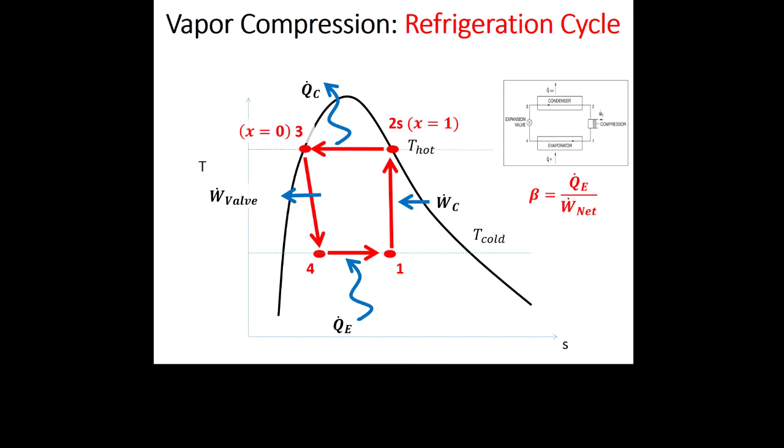But the energy cost is the net power you're putting in. To run this system, you're not burning fuel—well, I guess you could run your compressor on diesel or something, but typically these things are plugged into the wall, so you're running on electrical power. You're putting power in.

For each component, we can do the first law, and this looks very similar to the Rankine cycle. All the components are steady state, all have one inlet and one outlet, and there's no kinetic energy changes, no potential energy changes.

All the components, at least for now, we're going to say are adiabatic or passive, just like in the Rankine cycle. We'll assume no friction losses and no heat losses in the lines—constant pressure if we're adding or removing heat, and we're not doing first law analyses on the lines, so the state at the outlet of one component equals the state at the inlet of the next component.

So we get very similar equations to what we'd get for a Rankine cycle, or even a Brayton cycle. If we're trying to find power, it's m dot times h in minus h out. If we're trying to find a heat rate, it's m dot times h out minus h in.

But the further assumption we make about the valve is that it's isenthalpic—not isentropic, where delta S doesn't change, but isenthalpic, meaning the enthalpy stays the same. So there's no change in H. That means the valve is really boring; nothing happens in it except a pressure change. Because only the pressure changes, the valve power goes to zero.

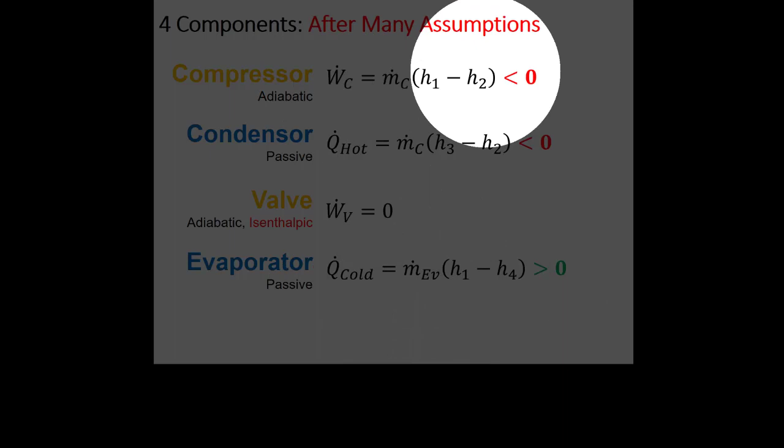So there's really only 3 components that we care about. Depending on whether it's a refrigeration cycle, I really only care about the heat taken out of the cold place, and my net power is just my compressor power.

So because we're talking about a refrigeration unit here, it's Q dot removed from the cold side that I care about. You do have to be careful with your subscripts. I like to think of this as Q dot hot and Q dot cold, because then I don't have to remember what the evaporator and condenser are doing—it's a little counterintuitive. If I just wrote Q dot C, I might get confused, since it could mean Q dot cold at the evaporator side, or Q dot of the condenser, which is the hot side. So be careful with your subscripts when talking about heat pumps and refrigeration units.

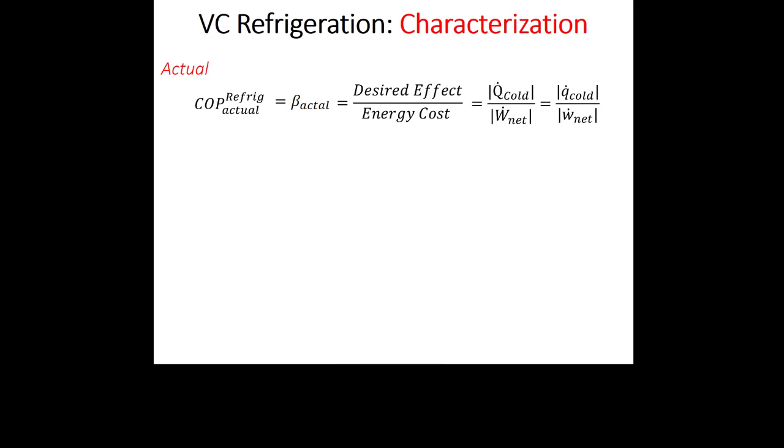So now if we're trying to characterize this cycle, we use the Greek letter beta, but I remember that because it looks kind of like an R for a refrigeration unit, if you squint anyway. But if not, you can just call it a COP, or coefficient of performance. It's going to be the magnitude of the heat rate removed from the cold side divided by the net power, which is really just going to be the compressor power.

So the first law will tell you this is H1 minus H4 divided by H1 minus H2, but then you take the magnitudes. Now we can always compare this to the Carnot or ideal refrigeration cycle, which is going to be just T cold over T hot minus T cold.

Heat pumps are exactly the same cycle. The only thing that's different about the heat pump is the energy benefit. What's your perspective? In a heat pump, this is sort of like a furnace. The purpose here is to heat up the place that's already hotter than the place you're taking the heat from. So here it's like you're taking heat from the cold place and pushing it into the hot place for the benefit of heating up the hot place. So it's really the exact same system. It's just you care about a different part, or you care about the energy transaction that's happening in a different component.

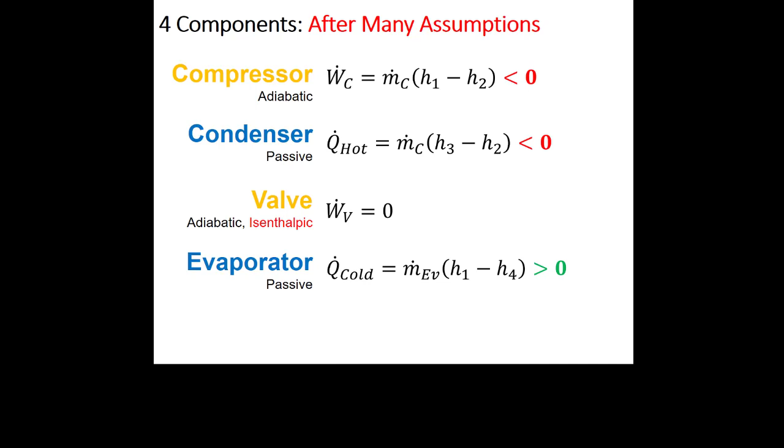So we get the exact same equations. The valve still has 0 power. The compressor power is still m dot times h in minus h out. The heat rates are still m dot times h out minus h in. But now what we care about is the heat rate on the hot side, the condenser side.

Again, we talk about coefficient of performance. Here we use the Greek letter gamma. I don't know why, but again, if you forget, you can just put COP. That's fine. It's still going to be the energy benefit divided by the energy cost. But now the energy benefit of a heat pump is the heat rate put into the hot side. The cost is still the net power.

So from those equations above, you can get this as a function of enthalpies because the mass flow rates cancel out. And then we can always check, and for something to be possible, we know that the actual coefficient of performance has to be less than the maximum coefficient of performance. I didn't say this for beta max, that this temperature especially, you need it to be in Kelvin or Rankine. But anytime I'm doing those Carnot calculations, I always use absolute temperatures, because you won't get it wrong if you use absolute temperatures. In that way, I just don't have to think about it. I just automatically go to absolute temperatures.

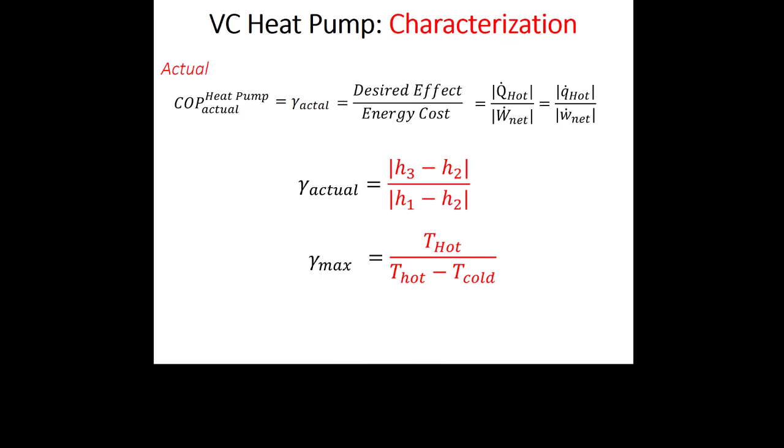So now heat pumps and refrigerators, I get my equations, and they're the same. The only difference is which heat rate I care about. So for a refrigerator, I care about the cold side heat rate, and for a heat pump, I care about the hot side heat rate.

Now, I'm at the point in thermodynamics where I say, what's the fluid? Because now I've got my equations. So if I'm thinking about this, the energy benefit and the energy cost is going to be some heat rate is the benefit divided by the compressor power, which is the same as the net power here. They're all open systems, so I get these equations. But then what's the fluid? It's going to be some kind of a refrigerant, and we treat those refrigerants in the same way that we treat

What's it called? Water, right? Because it's going back and forth across the vapor dome. So it's not like an ideal gas. It's like water. So if the fluid is a refrigerant, I've got to fix the states the way I would fix states in a refrigerant. So normally we'd look this up in tables. So just like water, we'd go to like the R134A tables instead of the water tables. But we use them in the same way, where if it's under the vapor dome, we're trying to find quality. And if we have a temperature and pressure, we're trying to think, well, is that going to be a liquid, or is it going to be a superheated vapor?

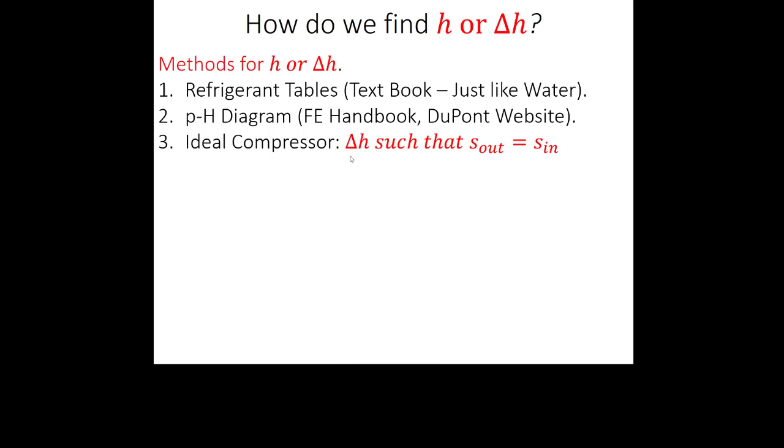Ideal compressors, we're going to find delta H when delta S is equal to 0. And then we go to the real compressor, so we need to use the compressor efficiency, which is like the pump efficiency, where the ideal power goes on top because it's a cost to the system. The isenthalpic valve is nice because delta H is 0. So once you know H3, you also know H4, because that's what isenthalpic valves are, right?

So this is a pH, or a pressure versus enthalpy diagram. Sometimes people call them SUVA charts, right? And it looks kind of intimidating when you look at it. This is like if you take Thermo 2, you might get faced with another intimidating graph called a psychrometric chart, which kind of acknowledges the fact that air isn't just air, that it's got water vapor in it too. But we don't worry about that in Thermo 1, right?

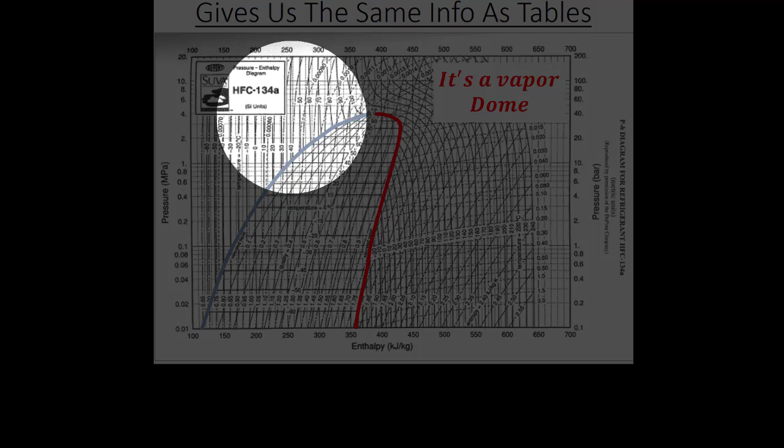So this is a way to graphically fix the states, right? It's just a scale diagram of a vapor dome for, in this case, refrigerant 134A.

So there's a couple of things about these diagrams that are important, right? So it's pressure versus specific enthalpy, although they just call it enthalpy. They never say the word specific on this diagram anywhere, but all of the values are intensive properties, so they're specific. If it's volume, it really means specific volume.

They're kind of cool because you can get most of the information that you'd get off the charts and tables. You don't have to do any interpolation, but you lose some accuracy because you're just solving these things graphically, right?

Like I said, they don't say specific in front of any of the variables, but anything that could have a specific in front of it does, right? So it says pressure, it means absolute pressure. It says enthalpy, but it means specific enthalpy. Temperature and quality are always intensive. It says entropy, but it means specific entropy, right? And it says volume, but it means specific volume.

So how do I read this graph? Pressure and enthalpy are the easiest things to read on this graph.

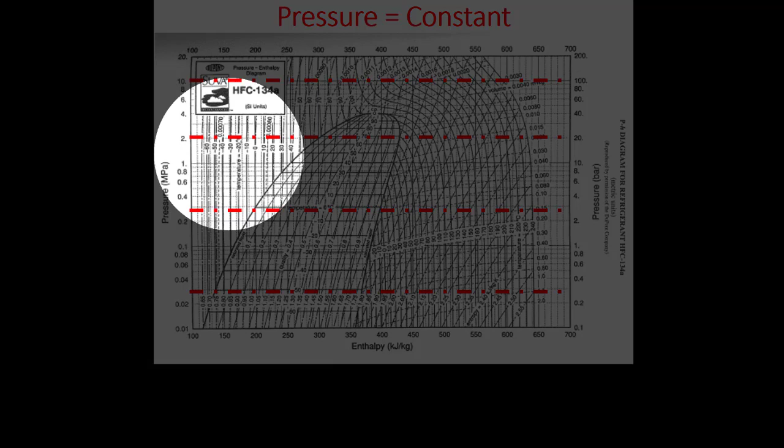Pressure is horizontal lines. The tricky thing here is this is a log scale, right? So you notice the difference between 0.01 and 0.02 is different than, well, I guess 2 to 4 is twice that, right? But 2 to 4 and 4 to 6 is different values, right? So again, you're estimating these things. You're looking for the line that you know, so the pressure that you know. This is pressure in megapascals, but it's got pressure in bar on the other side, so the other vertical axis.

If you're trying to measure specific enthalpy, right, because when we're trying to solve the first law, it's the H values that we're interested in, right? Then ultimately, when we find our points, we'll just drop a vertical line down and then estimate what the values for H is.

Constant temperature lines go down until they hit the vapor dome, and then they go across the vapor dome, and then they go down. So really it's down and to the right, I guess. But when you're in the liquid region, then it looks pretty vertically down.

One thing you do have to be careful of, because although I'll give you a better quality version of the image than this one, I always look where 0 is, because sometimes if I'm going too quickly, 10 and negative 10, it's a little sometimes tough to see where this negative is, right? Because these temperatures are not absolute temperatures, they're relative temperatures, right? So in this case, Celsius, but if it was imperial, it would be in Fahrenheit.

You have quality values under the vapor dome. So this is quality 0, 0.1, 0.2, 0.3, etc., all the way to 1. Obviously, you only get quality under the vapor dome.

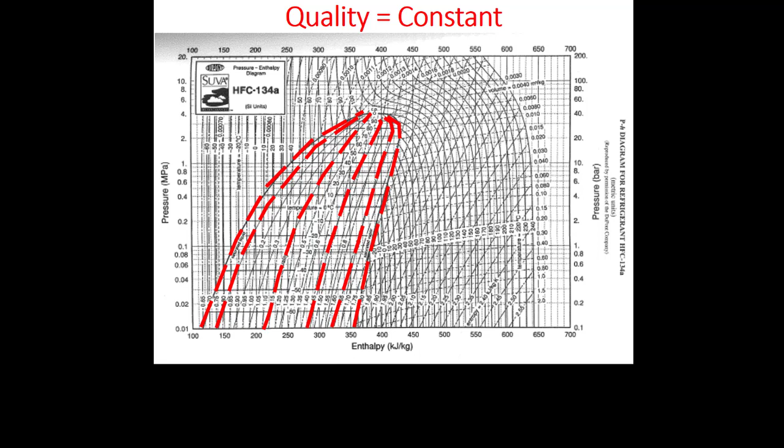Quality lines, I think, are sort of the hardest ones to read. So the values are down here, right? And these lines, the slope sort of changes as you move. They start pretty vertical on the left, but then they tilt more and more as you go left to right.

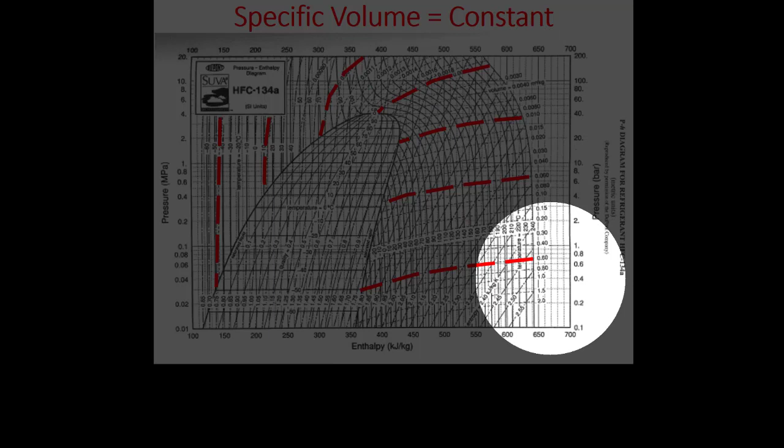Specific volume lines are also a little bit weird in that they sort of have this, they look like hair sticking up on top of a mountain or long grass or something in the wind, right? So they have this kind of funny shape to them, right? If you're looking for volume, lines are given up this side here, but then when they run out of room, then they switch in here and they just give you at the top there.

So in order to fix a state, as long as it's not an ideal gas, we need two independent intensive properties. The cool thing about these graphs is that every intensive property is essentially a line. So if you have a value for quality, you can draw a line. And if you have a value for temperature, you can draw a line. Where those two independent intensive properties intersect, they will intersect at a point, and that's your state point. But if you have dependent properties, they'll intersect, but at a line, not a point, so then you wouldn't be able to fix the state.

As long as you know that point, then you can drop a vertical line down and you can tell me the enthalpy, or you can look where it is in relation to all the other lines on the chart and give me any other property value.

So here's just a quick example of how to use this chart. Here we have an evaporator. We're going in at state 1 at 5 bar, or 500 kilopascals, and we have a quality of 0.2. And then what we do is we add some heat per mass flow. And then we come out at the same pressure, but we're at 20 degrees. So we've boiled some refrigerant.

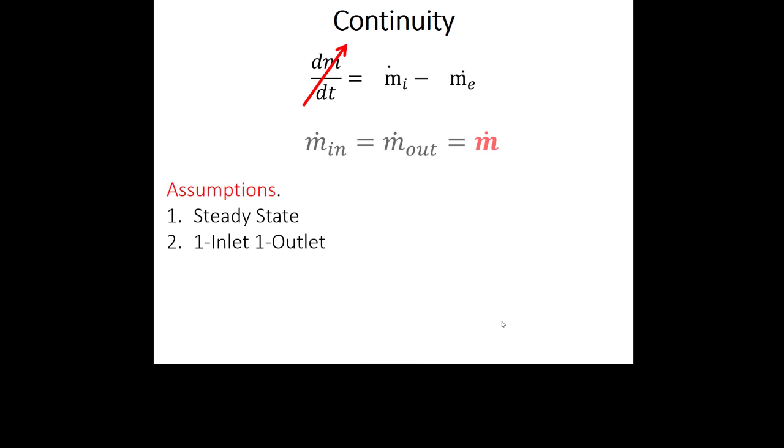So what this problem asks us to do is find the heat rate per unit mass flowing through this evaporator. So we're going to draw our control volume. That's the first thing we do for open systems. We do conservation of mass. It's pretty trivial in this case, because we're going to assume that it's at steady state, one inlet, one outlet, so there's only one mass flow rate. So the mass flow rate at the inlet is equal to the mass flow rate at the outlet.

The first law here, this is a metric problem, so I should get rid of all these gc's, but I'm going to cancel those terms anyway. So we're going to say it's at steady state, one inlet, one outlet, no kinetic energy changes, no potential energy changes, and it's passive because we're trying to solve for heat rate. No friction losses, so the pressure stayed the same. And no heat losses in the lines, although here we don't really care about the lines because we're only looking at one component. So we're going to get the equation that we usually get: Q dot is equal to M dot times H out minus H in. And we're expecting the heat rate to be positive here.

So here, Q dot over M dot is going to be H out minus H in. We don't know Q dot. So this is the classic thermodynamic problem in that, yeah, it's great, we have a symbolic solution, but I don't know any of these variables yet. But if I could fix the states, if I can find H out and H in, then I'd be able to find Q dot over M dot, which is what the problem asked me for. So now let's go through and fix the state.

So here we know state 1 is 5 bar or 0.5 megapascals, and the quality is 20% or 0.2. And we know state 2 is the same pressure, but 20 degrees Celsius. So first let's find state 1. Here's our pH diagram. Now you could, well, we'll talk about this in a second.

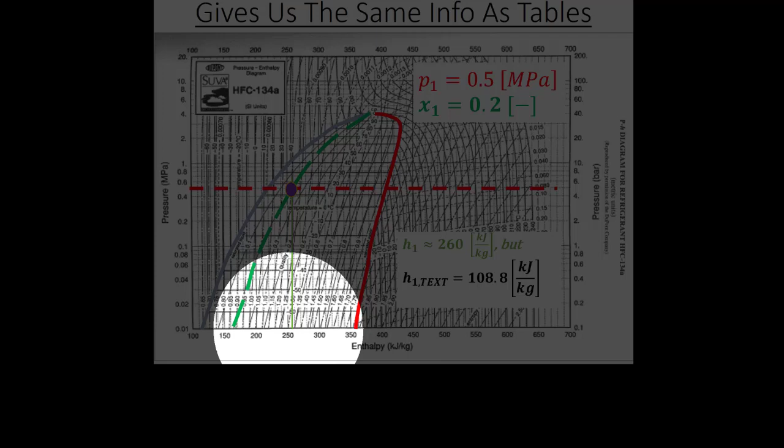Now I'm going to draw a vertical line down from there, and I'm going to estimate here, it looks like it's a little bit more than 250. I guess I could get out a ruler and measure how many millimeters between here and here, but I just eyeball this. The reason you're doing this is to get an answer quickly, but the sacrifice you're making is accuracy. So I'm going to say that's maybe 260 kilojoules per kilogram. But if you look this up in the textbook, it's way different than that: 108.8. And that's not like a graphical measurement error, because 108.8 is way over here.

So what's happening? Why is this so different? We got to remember that enthalpy is a little bit like pressure or temperature in that there's no real natural zero point. You could put the zero point or the datum anywhere you want. So whoever made the tables in the textbook and whoever made these charts just picked different zero values.

But that doesn't really matter because the first law is always asking us for delta H. So the changes should be the same even though the individual values are different. They're all offset from the same point. It turns out the textbook values are always about 150 kilojoules per kilogram lower than the handbook values or the values on this chart.

What this means is that you can never do a problem half in the textbook and half on this graph. You have to pick one of these two methods and stick with it till the end of the problem.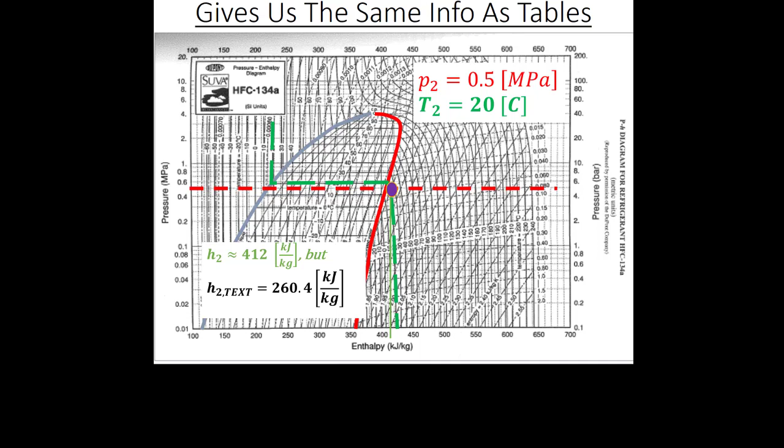Right, so we still see the same difference here. Yeah, it's okay—I think that's one of the banes of Zoom, we just had a student who had some laptop issues, so they were out for a bit. So what I'd suggest is you check out the posted notes or maybe one of the thermo shorts to get up to speed with where we are. So we looked at how to do these cycles, and then how to fix the states when it's refrigerants. You probably want to check out the notes for that, but we'll go through a problem right after we're done this too, so you'll get some sense of how to do that.

So we did the first law, and we found the heat rate over the mass flow rate is what we'd normally expect, H out minus H in. And now we fix the states two different ways. So here's where we get to check to see if the graphical method was reasonable—if it's reasonable, we should get about the same answer. So if I use this pH diagram, I got a value of delta H, or Q dot over M dot, equal to about 152 kilojoules per kilogram.

In this case, I got pretty lucky. I wouldn't expect your answers to be this accurate. Having an error on the order of 10% is certainly not unheard of doing this. I just picked reasonably good numbers here. You can see you get basically the same answer even though these values for H out and H in are significantly different. That's just because you're taking delta H in Kelvin, or delta T in Kelvin and delta T in Celsius, and the change should still be the same even if the individual values are different.

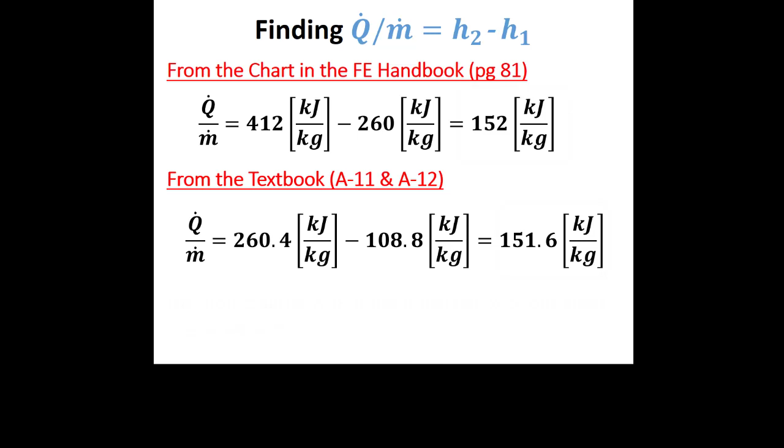So we can take a break. Although maybe it's better to just go through so that we don't finish late.

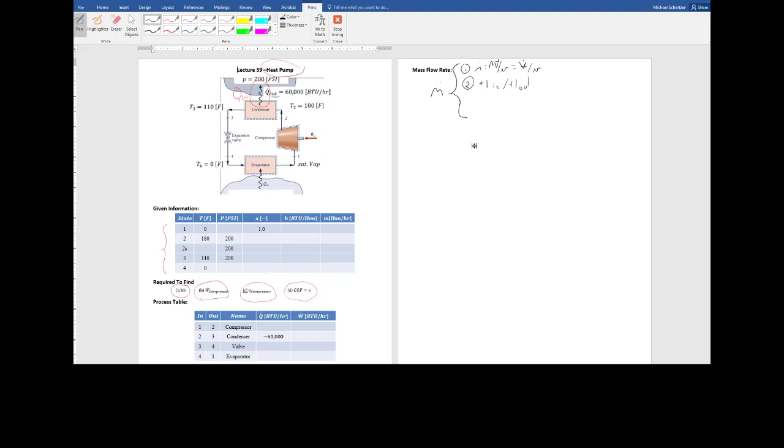Option two, maybe I look for a component with more than one inlet or more than one outlet. Option three, I look for some place where I know W dot or Q dot — for both of these, I'm going to do the first law.

In this case, I don't have any components with more than one inlet and more than one outlet. I don't know the area, the velocity, or the specific volume anywhere, so it's not that either. I don't know anywhere I know W dot, because I've got to find W dot — I guess I know W dot is zero through the valve, but that doesn't help me. But I do know that Q dot out is 60,000 BTU per hour. So here I know Q dot out.

So here I'm going to do the first law on the condenser. I'm going to say that dE by dt is equal to Q dot minus W dot plus the sum of m dot in, H in, plus V in squared over 2GC, because it's imperial, although we'll see it doesn't really matter because I'm just going to cancel it out, plus G over GC, Z in, minus the sum of m dot out, H out, plus V out squared over 2GC, plus G over GC, Z out.

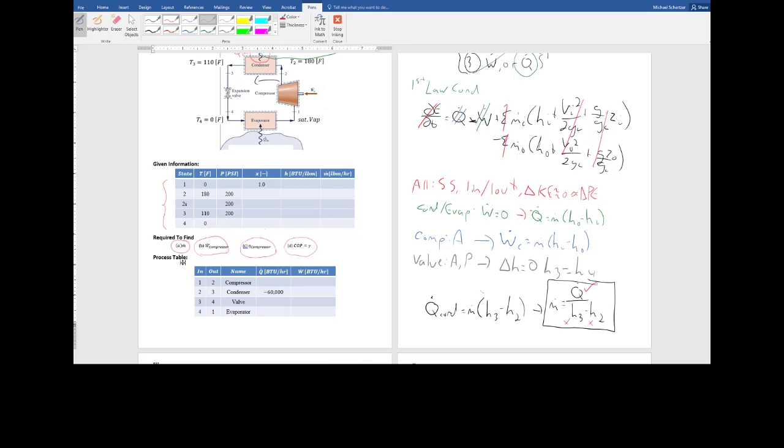So that's my symbolic solution. Here I know H, but I don't know H3 or H2. I know Q dot, but I don't know H3 or H2. So here we have a symbolic solution.

Compressor power, we already have an equation for this. W dot of my compressor is equal to m dot times H in. I go into my compressor at state 1, come out at state 2, H1 minus H2. This I'm going to get from part A. I don't know H1 or H2, at least not yet.

For my isentropic efficiency, or my efficiency of my compressor, this is going to be power over power, but the compressor is a cost to the system, so the ideal compressor costs less than the real compressor. So this is going to be m dot times H1 minus H2S divided by m dot times H1 minus H2.

Finally, I want my coefficient of performance, which is gamma. Because this is a heat pump, this is going to be Q dot of the hot side over W dot net, and we'll take the absolute value there. I always put the absolute values because W dot net is always in, right? So work in is negative. In this case, Q dot out of the hot side is also negative.

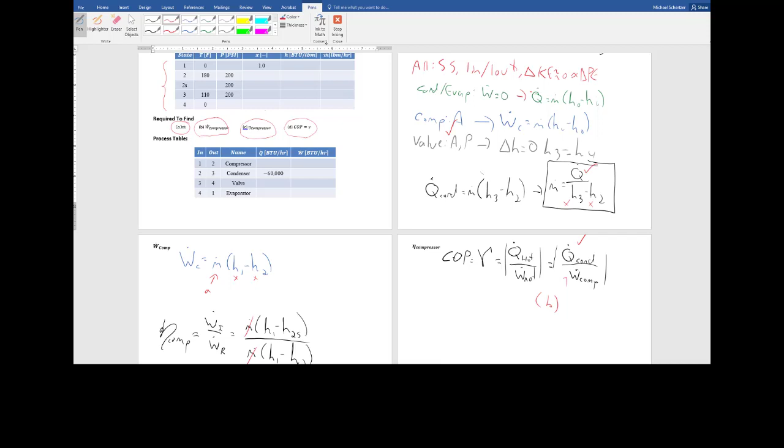But now how do we fix the states? I could draw this on the diagram, but I think instead we'll go through fixing the states graphically over here. So again, you can go through the notes and see how we do all this. And I got the symbolic solutions down there, but first, let's go through and fix the states.

So this is a cleaner version of this, and if you get it on an exam, you'll have a nicer version instead of the one that I had in the last part of the lecture. So the nice thing here is that for almost all the states, we have two intensive properties. I don't always know if temperature and pressure are independent, but I'll assume that they are here. But this gives me a fighting chance to fix all the states.

The only one where we only know one piece of information is the isentropic outlet of the compressor. But there, I'm going to remember that it's isentropic, so that delta S from 1 to 2S is equal to 0. So let's kind of march through these and see if we can fix them. So there's a bunch of states at 200 psi, so that's kind of where I'm starting from. We can see that state 2, state 2s, and state 3 are all at 200 psi. Again, we can use that to figure out how many pressures we're supposed to have.

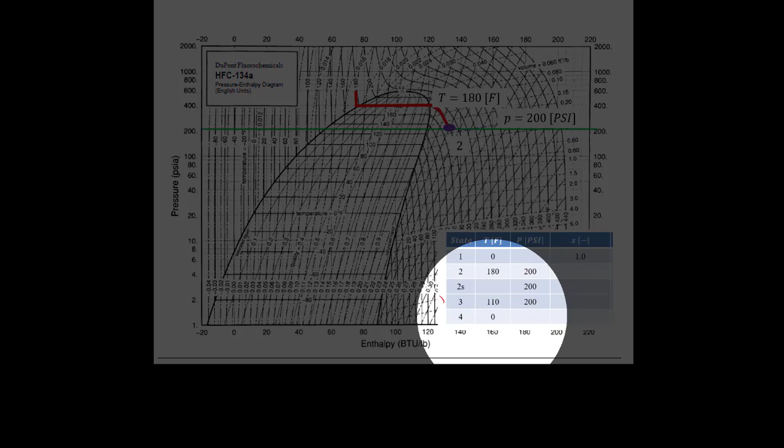But state 3, well, that's at 110 degrees Fahrenheit, right? So 110, here's 100, there's 120. So 110 is going to be somewhere in between those two. So I put this red line as 110 Fahrenheit, right? So that goes about there, right?

Now, the next thing I want to see, I see that state 1 and state 4 are both at 0 degrees Fahrenheit. So hopefully that's the next line that animates here, right? So 0 degrees Fahrenheit is here, right? And then I got a choice. I can do state 1 or state 4 next, right?

So state 4, the thing I remember, as I move from state 3 to state 4, I'm going through that valve. And the valve is isenthalpic. It drops the pressure while keeping the enthalpy the same, right? That's its job. So state 4 is vertically under state 3. So that's cool. H3 is equal to H4. So I only really need to find 3 H values. 4, I guess, because I want the isentropic outlet too of the compressor, right?

And then state 1, it tells me it's also at 0 Fahrenheit, but that it's at a quality of 1, right? And so quality goes 0.1, 0.2, all the way over to the saturated vapor line, which is quality of 1. And there's state 1. So now we have located state 1, 2, 3, and 4.

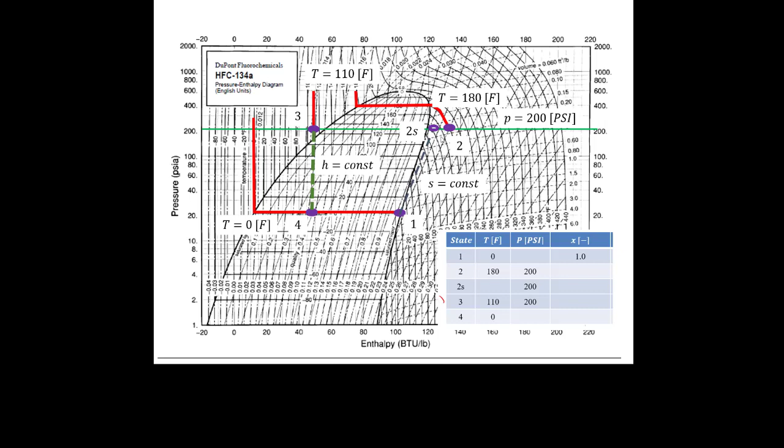And in order to solve those symbolic equations, I need to find H values. Now, like we said before, you can't half do this problem in the textbook and half do it on the chart. You pick one or the other because they have different zero points, right? So what we do now, I mean, you won't get to do this on yours, right? But I can get rid of all that other junk and just drop vertical lines down.

So here, again, I'm not sure because I'm just graphically measuring it, but I'm going to say that that's about 45 BTU per pound mass, right? Straight down from state point 1, I'm going to say that's about 100 BTU per pound mass. It's a little tricky because they don't have tick marks out here. So they say 100, H is equal to 100 BTU per pound mass here, but I don't know where the tick mark's supposed to be.

Is it centered on the number? I don't know. So I picked 100 there. I'm embracing the fact that it's not perfect, right? I'm gaining speed by doing this, or efficiency, but I'm losing accuracy, right?

So here I'm going to say that's about 120, right? And then I drop one down here. I'm going to say that's about 133. And now I fixed all the states, right? And I did it significantly faster than if I was doing a bunch of interpolation and looking stuff up in the textbook, right?

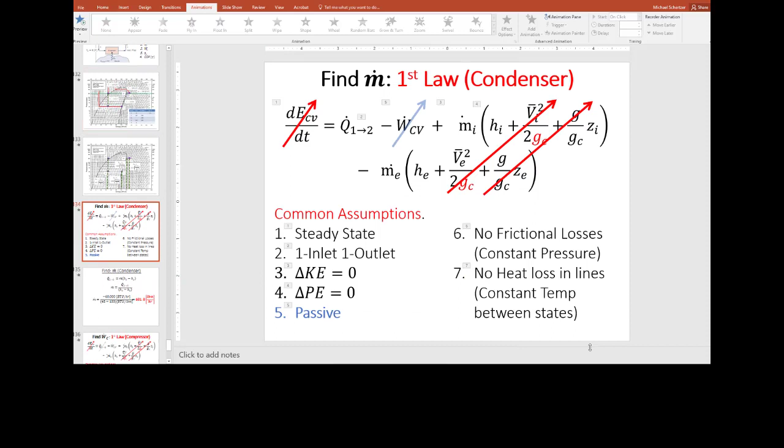So now we can go through this again, right? So for all of these components, all of them are steady state. All of them are one inlet, one outlet. We neglect kinetic and potential energy changes everywhere. The compressor, the heat exchanger, so the condenser and the evaporator are passive.

No friction losses, right? No heat losses, right? So if I'm trying to do the condenser, I get this equation: Q dot equals M dot times H out minus H in.

Remember, we did this to find the mass flow rate, because there were 3 ways to find the mass flow rate. One of those ways was to use the place where you know Q dot or W dot. So I can use that to find the mass flow rate.

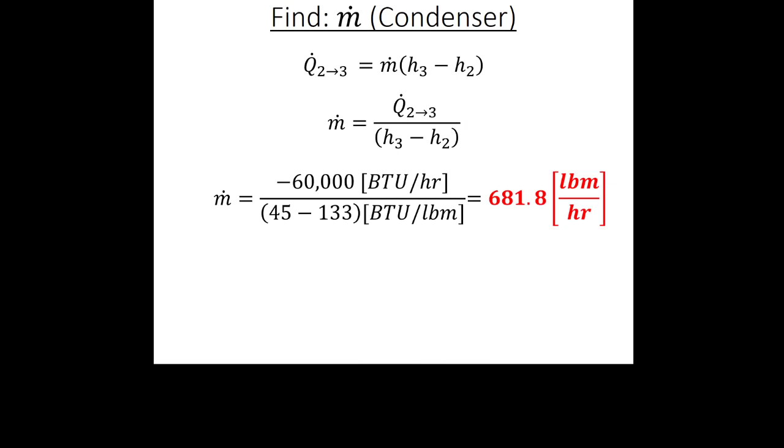Here again, I might have to take an absolute value, although it should work out. And here I'm just going to leave this, unless the problem specifically said pound mass per second. I could divide by 60, by 60 squared, because 60 would be per minute, and then if I divide by 60 squared, I get per second. But I just left it as 681 pound mass per hour.

Now, it also asked us for the compressor power. So just like for most compressors, they're all steady state, one inlet, one outlet, no kinetic energy change, no potential energy change, adiabatic instead of passive.

So here we're going to get that W dot is M dot times H in, which is H1 minus H2. This is the real compressor, not the ideal compressor, so it's H1 minus H2, not H1 minus H2S.

Here, again, this is going to give me BTU per hour, but if I wanted to change this into horsepower, I'd need some kind of conversion factor, which I could look up on the equation sheet. So my compressor power is just under 9 horsepower.

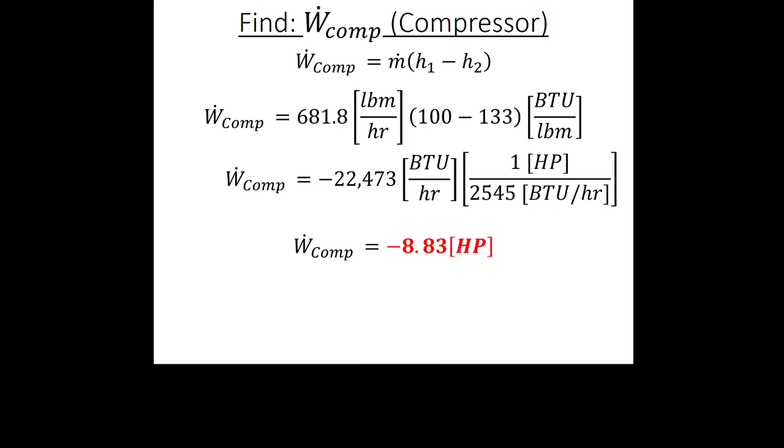Now, again, you never go into Home Depot and say, oh, I want a compressor that's negative 9 horsepower. But we know as engineers that the negative value here means that you're putting power into the system. You're adding power into that fluid to increase its enthalpy.

The compressor efficiency is going to be the ideal compressor power divided by the real compressor power, or H1 minus H2S over H1 minus H2. We fixed those states. Here, again, you see that the delta H for the ideal compressor is less than the delta H for the real compressor.

You have to find it that way. So you know that the power is less for the ideal case because this is a cost to the system. So here we found that the compressor efficiency was just about 61%.

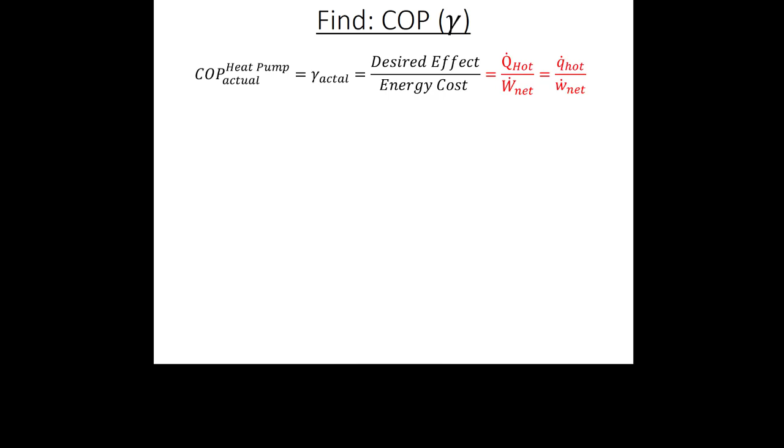Finally, we want our coefficient of performance, which is the energy benefit over the energy cost. The energy benefit is that heat that we're pumping into the hot place, and the energy cost is our net power. So here you could calculate Q dot hot, but it's given to you.

So it's like one more thing that I can screw up putting it into my calculator, or I can just take the value they give me. So that's what I did. I just took the value that they gave me.

I put, to be safe, the net power as the compressor power plus the valve power, but the valve power is 0 because that's m dot times H in minus H out, but H in and out are the same for the valve. So that goes to 0.

I don't technically need absolute value signs because it's a negative divided by a negative. And I see that my coefficient of performance here is 2.67.

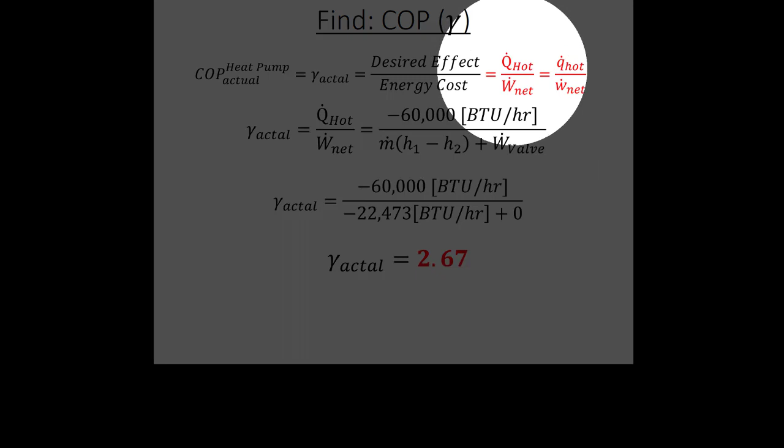And that's how I do a heat pump problem. If it was a refrigeration problem, it would be almost exactly the same. The only difference is that the thing I cared about, the energy benefit for the refrigeration system, is Q dot cold. Otherwise, it's all the same. You still fix all the states in the same way. You just do a different control volume when you're looking for the energy benefit.

So that hopefully gives you a good overview of how to do refrigeration and heat pump cycles. But also, it means we're done with new material.